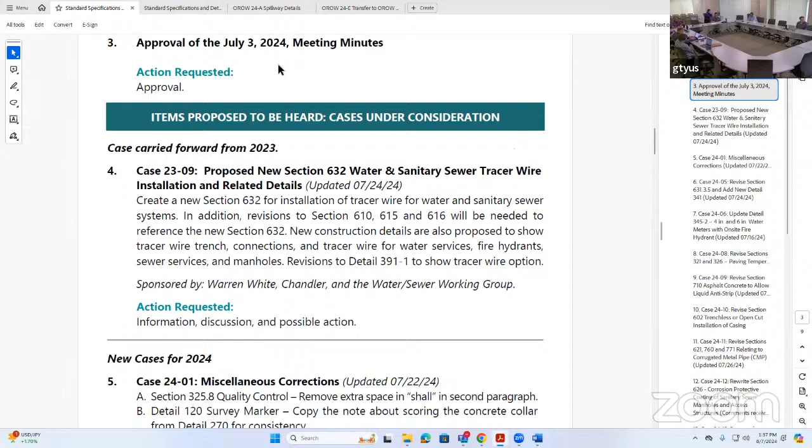Thank you, Gordon. All right, we're going to move into items proposed to be heard for cases under consideration. Agenda item number 4, cases carried forward from 2023. Case 23-09 is a proposed new section 632, water and sanitary sewer tracer wire installation, and the related details. This case is sponsored by Warren. Rachel, are you going to be covering for Warren today on this case? Yes, I'm your designated Warren today. He's on vacation. All right. Very much. You want to give us an update on the case?

Yeah, absolutely. So the last time this case was brought before the committee in July 2024, it was determined that we would revise section 632.1 and add a new paragraph regarding the purpose of the tracer wire and referencing ARS to allow for other acceptable methods for locating underground facilities, marker balls, the little marker flags that are above ground, et cetera. Section 632.3.1 general was also revised, adding a bullet to account for the installation where the tracer wire doesn't follow a main line or service lateral, and instructions for how to do that. Also added that PVC conduits are required to be shown on the plan sheets and the as-built. And then detail 399-3, the tracer wire for a fire hydrant, was also revised, adding language for alternate grade level and in-ground access boxes.

I think Gordon's trying to catch up. Oh, sorry. No, it was a long one. Okay.

So this particular case is up for possible action today. Before that, we'll move it into open discussion. I don't have any additional comments on this case. I already got with Warren on that before he left. Does anybody else have any discussion they want to bring up on this particular case? Hi, Mr. Chairman. This is Josh Ford from the city of Buckeye.

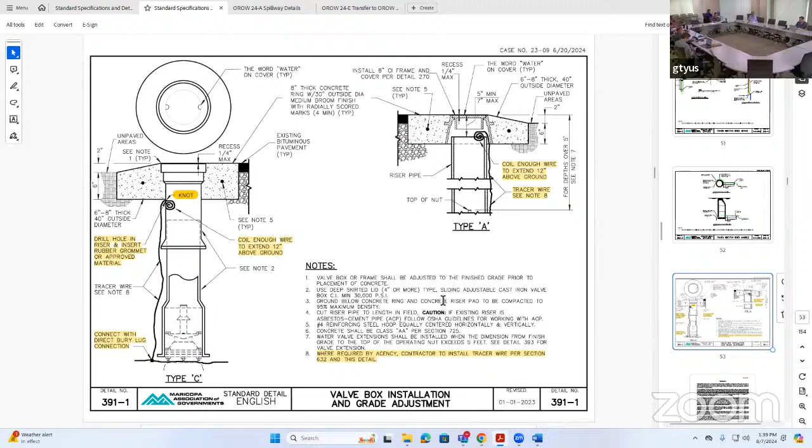Yes, Josh? I was just going to share, I know last meeting there was, I think, some discussion about the fire hydrant detail and whether putting a box on the hydrant would be a concern to fire departments. I believe that's what led to kind of an alternative location. There was a request to coordinate with our local fire departments, and I did do that. I sent that over to our fire marshal here at the City of Buckeye and asked for his input, and just wanted to share that at least from his and the Buckeye fire department's input, there were no concerns with either option presented here for the termination access box.

So I'm hearing there were no concerns. Is that correct? That's correct. Great. Yeah, I ran it through my fire marshal's office as well prior to last month's meeting, and the response I got was preferably attach it to the backside of the hydrant so it doesn't interfere with taking the caps off the hydrant. But other than that, they had no concern with it. Anybody else check with their fire marshal's office? Anybody else have any feedback on it? You can see on the detail, the alternate access is shown now. Yeah, thanks for pointing that out, Gordon.

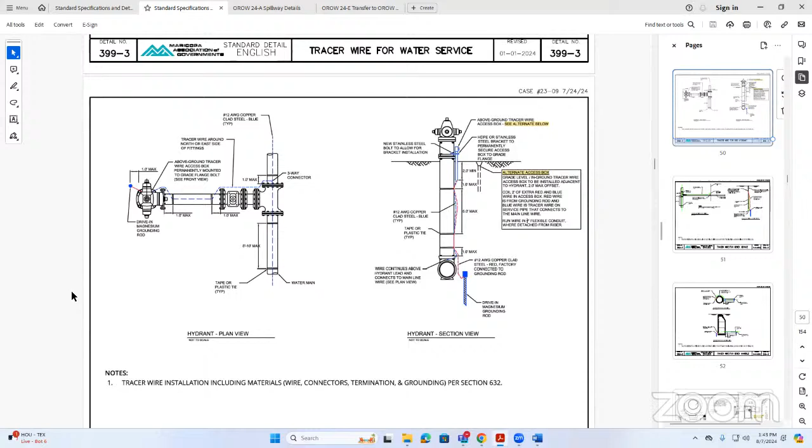Do any other committee members have any feedback or comments on this case? I think it looks pretty good. I agree. I don't think lines on that alternative would help clarify anything. Thank you, Paul. Well, hearing no other additional comments or discussion, I'll entertain a motion for action to go ahead and vote on this thing and get it through.

Gordon, can the case sponsor make a motion? Yes, they can. Rachel, do you feel like it's ready to go through? I do. Would you be willing to motion for a vote? Oh, yes. Thank you, Rachel. Can I get a second to put this into a vote? This is Josh Ford with the City of Buckeye. I'll second that. Thank you very much. With the motion and second, we'll move into a roll call vote.

Okay. Start with ADOT again. Yes. Avondale, yes. Buckeye, yes. Chandler, yes. El Mirage, yes. Gilbert, yes. Glendale, yes. Goodyear. Maricopa County, yes. Mesa, yes. Peoria. Phoenix, yes. Scottsdale, yes. Surprise, yes. Tempe. Youngtown, yes. Thank you. The motion passes unanimously.

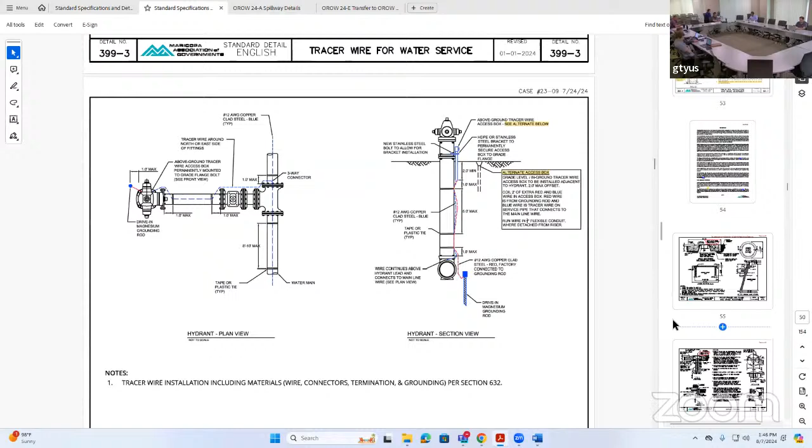All right, let's move into new cases for 2024 miscellaneous corrections. I don't believe we have any new miscellaneous corrections this month that we did not have last month. We'll open the miscellaneous corrections up to discussion if anybody wants to discuss anything in particular. I think there were some minor updates to detail 441, for the sewer cleanout. Should have been the steel hoop and the medium broom finish, correct?

Okay, and the score marks in the type A on the clean out also, because they weren't shown. I'm sorry, Paul, I didn't get that. Can you speak directly into the phone? The score marks in the concrete after you pour it, they weren't shown to do that on the clean out when you got to do it on everything else.

The radial score marks. Did I add that in there, Gordon? I think it's, yeah, just as a note at the top here. Okay. I think the only change from the last time was just spelling out vitrified. Yeah, I thought we captured that at the last meeting. Maybe I'm incorrect, but yeah, it was vitrified clay pipe versus VCP. All right, was there any other updates besides 441? I don't believe so.

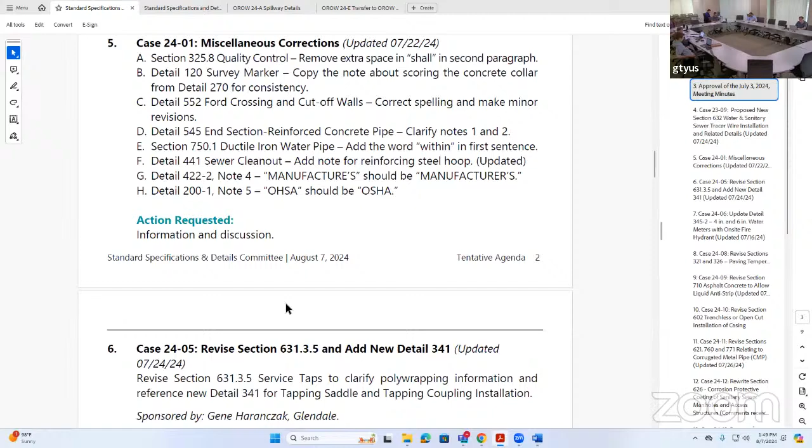The year is going fast. All right, back to agenda item number 6. Sorry about that, guys.

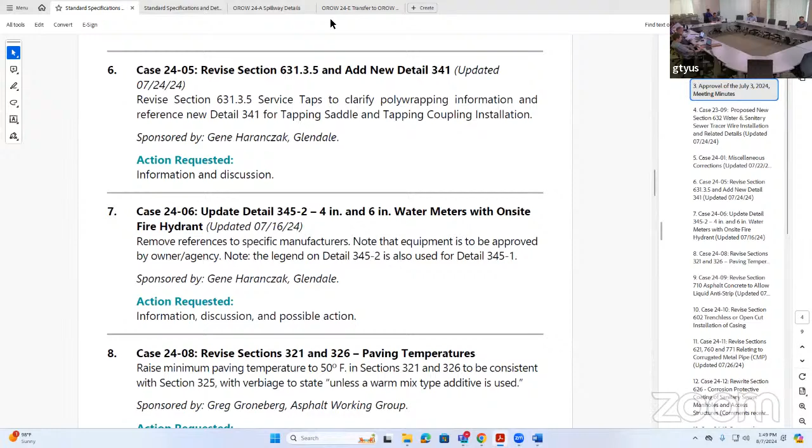So previously at the July 3rd meeting, Jeffrey Butters explained the differences in the dissimilar metals, how they negatively impact the ductile iron pipe, and they accelerate corrosion related failures when it's not applied and wrapped properly. So this one here, the only real update that I have is our drafter got it into CAD for me. I shared that with the group, shared it with Gordon. That should have been, not published, but updated on the website. Hopefully everybody had an opportunity to review it.

This one, I think it's there. I haven't received really any feedback. I did receive feedback early on, but the last meeting, I didn't receive anything except for the direction of the tape to make it match so it didn't look like this pipe was spun around the arch in the tape, and that was really it. That's basically the update on it. I'm going to open it up to discussion to the committee for any feedback on it.

Chair, Ryan Nichols with City of Mesa. I have some comments from my Water Resources Department. This is definitely not my area of expertise, so this is more of a comment / question, and hopefully you'll have enough understanding to answer it for me. I hope so. I put it together. So as I understand it, this has to do with new services in general, and this comment is maybe not exactly associated with that, but related. So I'm just going to read the comment as I received it here.

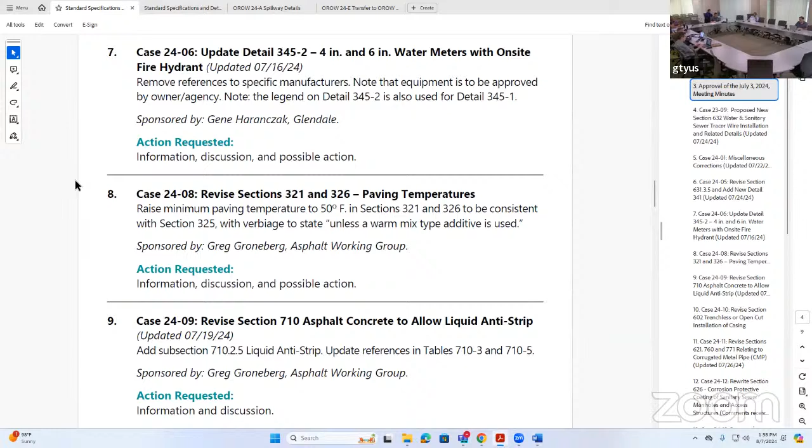All right, moving on to agenda item number 7. This is case 24-06, update detail 345-2, 4-inch and 6-inch water meters with on-site fire hydrant. So this is a water meter to meter the fire line. This one here. I did have a couple updates on it. What you see in red were the updates from the last meeting.

Basically, up in the top language, you can see where I put the meter type and manufacturer, and then also per the manufacturers with an apostrophe S. And then if you look at note 8, the 2-inch water meter type and manufacturers at the discretion of the owner or agency. Those notes were made, and then also at the very bottom, manufacturer apostrophe S for that as well. And same thing, water meter type and manufacturer.

So this one, Gordon was kind enough to help me out in getting it into a clean version. Did we post that? Oh, there it is. Thank you, Gordon. So this one here, I'll open up for discussion to the committee.

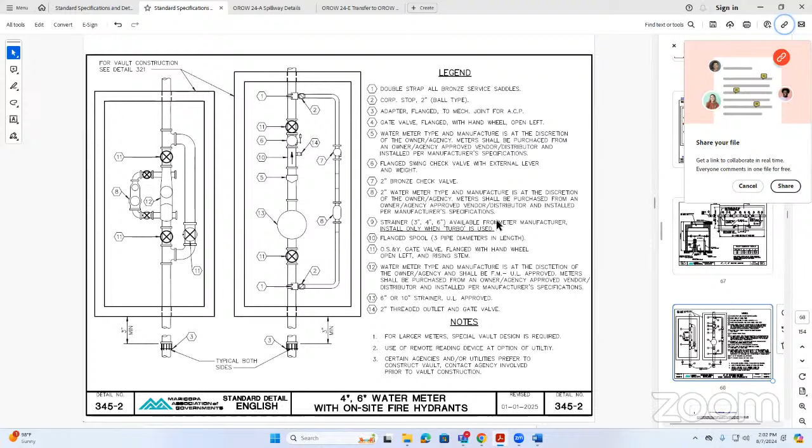So Glendale does not meter on-site fire hydrants. We backflow them. We do have a backflow on them. This was an existing detail, and hopefully this gives you some clarity. The motivation here was for me to try to remove the manufacturer-specific names that were called out. That was really the only motivation for this whole thing. It did kind of grow a little larger than what I anticipated, but we've sorted through that throughout the meeting.

But you'll notice on the original detail, it called out Rockwell, called out Hersey, called out Neptune, which not all, but some of those have been bought out by other businesses and are no longer in business. That's why I proposed the case to change just to more of a general, at the agency's discretion. Does that help answer your question? Yeah, so it sounds like you're saying this is just more cleanup on some references rather than reinventing the wheel, or rather than actually an overhaul of the detail itself. That's correct. Okay.

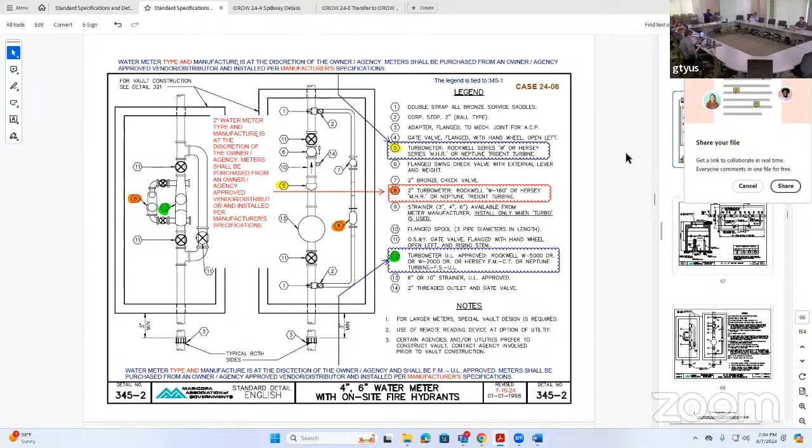Okay, thank you. Hey, Mr. Chair, I was just mentioning on item number 3, this is Jose with the City of Phoenix. Should we just make a note instead of calling out the mechanical joint coupler for ACP, just for different pipe materials? I'm not sure that ACP is used. Yeah, just maybe call out, you're right, unless you're tying on to existing infrastructure that's 20 plus years old. Mechanical joint that's needed for different pipe material. Yeah, adapter flange to mechanical joint for, let me look at that. Yeah.

Do you have any suggestions? I only have limited experience with this with Phoenix, right? So that will be a DIP main, but I'm not sure about other municipalities. Right. Well, you want to be able to adapt to DIP, to C900, whoever's using what. Yeah, I'm not sure what you will use in C900. What if you just had 'to mechanical joint as needed' or something like that? Yeah, as needed for different pipe material. Because if it's DIP all the way through, you're not gonna need anything. Okay. All right. Those are pretty minor changes.

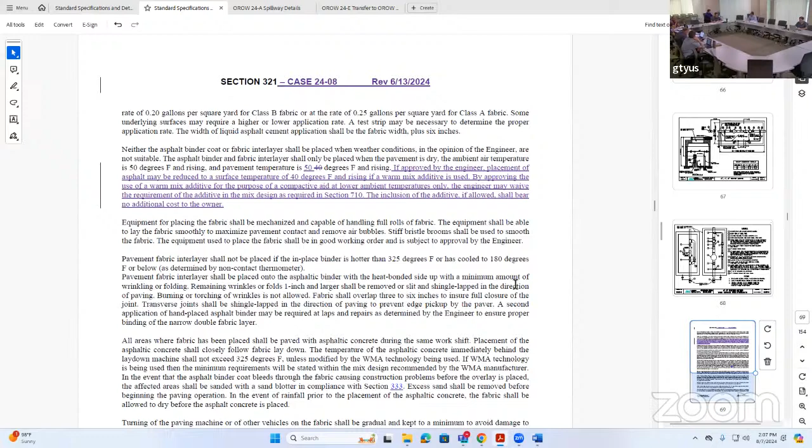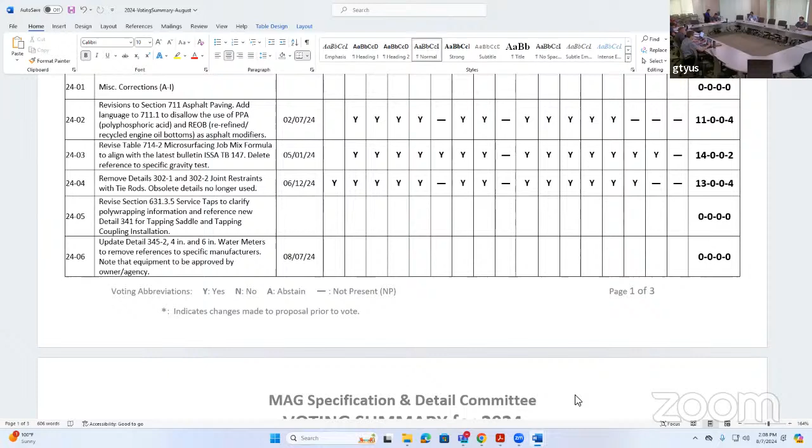Yeah, I think it's ready to go, but I'm going to open it up to the committee for discussion. Anybody have any comments or questions on this particular case? All right, hearing none, I'll entertain a motion to vote. Chair, I'd motion to approve case 24-08, revised sections 321 and 326 paving temperatures. Thank you, Ryan. Can I get a second on this case? This is the town of Youngtown. I'll make that second. Oh, thank you very much. All right, with the two motions, we'll move into a roll call vote. Okay.

Case 24-08. Yep, that's correct. Peoria, yes. Avondale. Avondale. Buckeye, yes. Chandler, yes. El Mirage, yes. Fountain Hills. Gilbert, yes. Glendale, yes. Goodyear. Maricopa County, yes. Yes. Yes. Peoria, yes. Phoenix, yes. Scottsdale, yes. Yes. And Youngtown, yes. Thank you.

The case passes unanimously. Thank you, Gordon. Thank you. I can barely hear you. Avondale votes yes on that. Peoria votes yes. I think your mic is off, Gordon. Oh, I'm sorry. You're right. My mic was off. Probably hearing me through Gene's mic. But is there anybody that I missed? Okay, I think we're good then. We have Tempe. I don't believe Tempe's present today. We have a yes on there for the previous case, 24-07. That was last month, I think. Okay. All right, thank you, committee members.

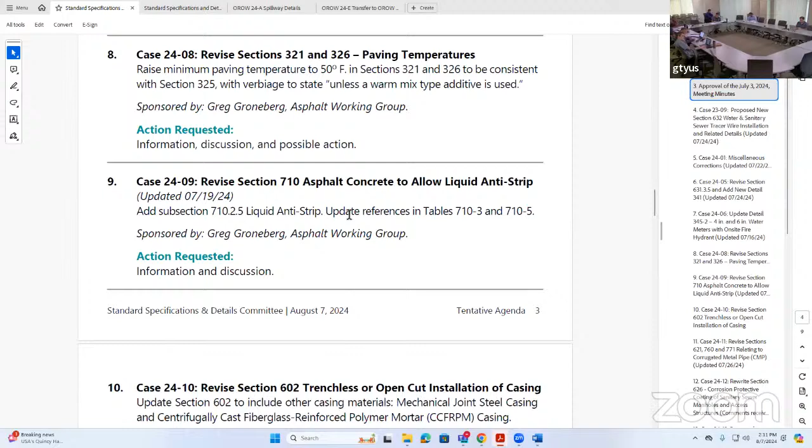All right, we're going to move into agenda item number 9. This is case 24-09, revised section 710, asphalt concrete to allow the liquid anti-strip. This one is also brought to us by the Asphalt Working Group. Greg, are you going to give updates on this one? I am, Mr. Chairman. So there's only been one change that was revised after last month. Last month, you saw something very, very similar to this one.

Gordon, if you go to page 710-30. Yep, that one right there. So last month everything was the same except we had X's where the Marshall and gyratory PSIs were, while we were still doing some investigative work. Last month we talked about the bottom paragraph that used to exist below this table, and when it got to the real world, how would you administer this, having 3 years of historical data, if there was a new pit. There was a lot of potential confusion on how that could be looked at.

So the thought was to do this instead: take the Marshall and the gyratories from their current 100 and 75 pound respectively in MAG, and raise both those minimum values by 25%. That is where that number came from. So now, if you're going to use a liquid anti-strip, either by itself or a combination thereof, it has to meet that 25% higher bottom threshold, just to give a little bit of extra assurance.

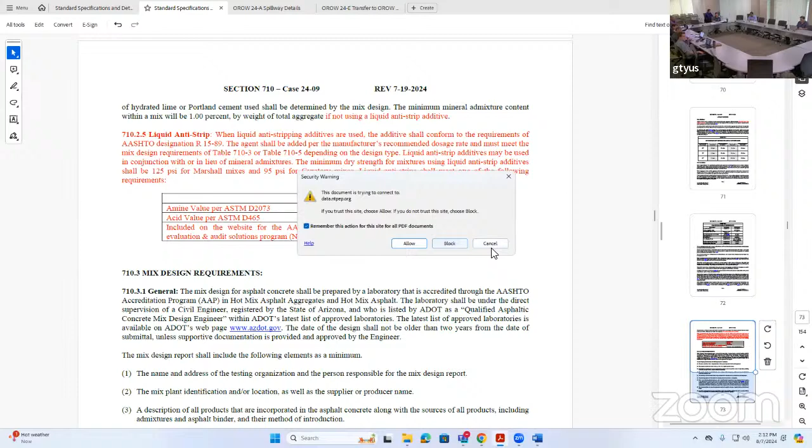We had one other comment too, as far as the link. Gordon, I cannot get that link to paste in there as a link for some reason, but if I type it all in, I can get that to come up every time. I'll make it a hyperlink. Yeah, I couldn't seem to get it to do it, but it comes up. But anyway, neither here nor there. That's where this case is.

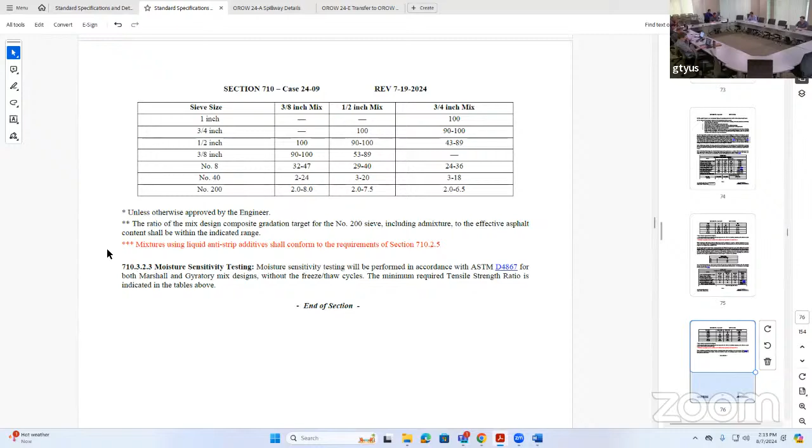There's two notes then below table 710-3, if you go down there a bit. So now there's 3 asterisks behind number 6. And the note below just says mixtures using liquid anti-strip additives shall conform to the section, saying you have a higher minimum threshold than what's listed in the tables. Other than that, I'd open it to the floor for any comments, questions, concerns. We'll open it up for discussion from the committee. Thank you, Greg, for those updates.

Jose with the City of Phoenix. Just a question. Was the data ever gathered and distributed to find out exactly what the historic dry strength has been on the various mix designs from different suppliers? So pretty much all of them. Historically, we've always kept it at the 100, and it appears that most of them are considerably higher. The same trend would probably still continue even with this, especially if you use a combination thereof. Straight up by themselves, don't know.

There's so many new technologies out there to vet every single one to know whether one might drop all the way out. But there's also another group that says maybe these higher tensile strengths, when you get up into the 180s, 200s, are leading to some of the cracking we're seeing. So I don't know which school there. So the 25% was kind of like a happy medium?

So the thought process behind the 25% increase was that a bunch of people said MAG's minimum thresholds have been in there for years. If you average, say, 150, the thought was we'd drop that one by 25%. So instead of keeping that one at 25% less, let's just raise the bottom level. No, I understand the idea, but how did we reach just increasing it by 25%? Did we just pick a number?

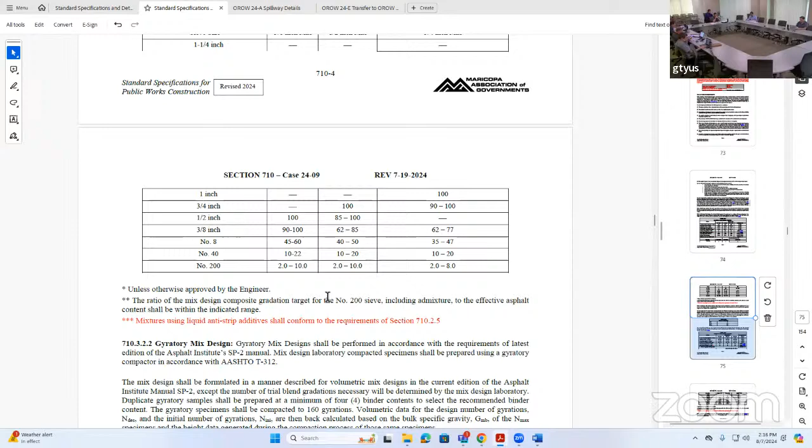Greg, I got a question for you. So the section, you mentioned the 3 asterisks note that references back to section 710.2.5. Maybe I'm a cynic here, but people don't read the notes. They just see the 100 in the table and they won't read the note because they'll see what they want to see. Would it clarify anything? And I'm asking the question. I'm not saying that this is what I think needs to happen, but would it clarify it if in the table it said 100/125? Because then if you ask the question, well, which is it, 100 or 125, you're more likely to see the note and go back and refer to the section where it clarifies that.

I would argue that the same would be considered for somebody that may already have a current Marshall mix, and somebody may want to say, well, I'm not using liquid antistrip. Then now somebody's saying, well, the table says 125, I could choose. And the only reason we kept the asterisk, Ryan, was to keep it consistent with the other two notes that already existed within the tables. Like the double asterisks. Yeah, there's a single and a double asterisk in the same table, so we just kept it consistent for the same reason. Okay, fair enough. That was a good question, Ryan.

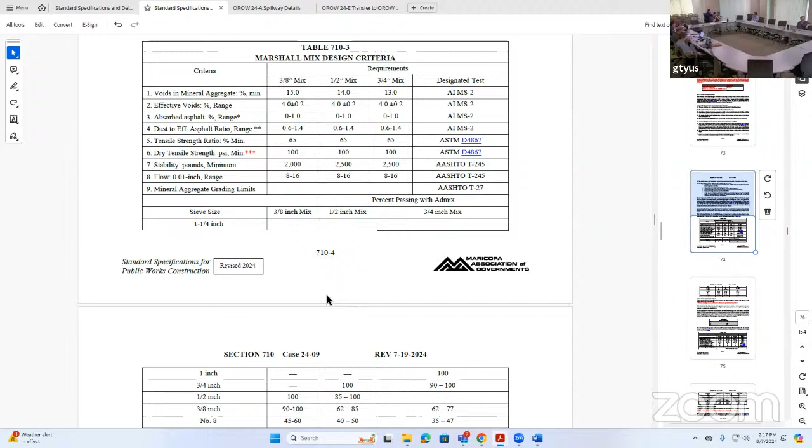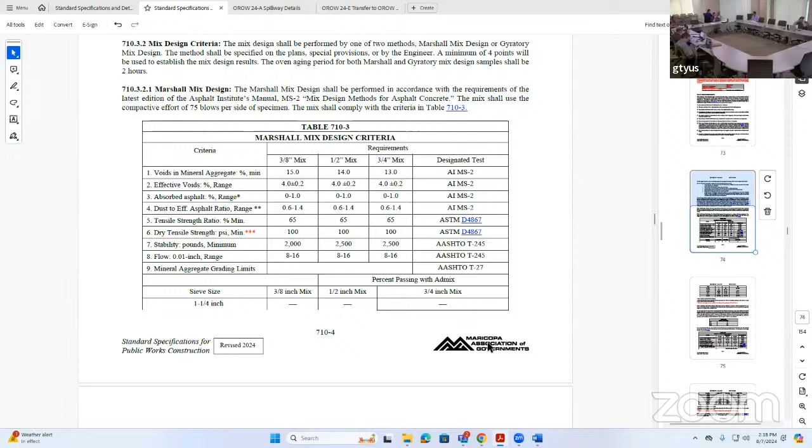Yeah, I agree that it's all technically there, and if I had to go to bat to defend it, I definitely could. Gotcha. Yeah, I see Greg's point, though. If we do add that additional number next to it with a slash, it can be interpreted as either or. That would be more of a concern there. That's a happy medium, so you don't have to flip the page. You could add the 125 PSI to the note on the 3 asterisks. Right. So under table 710-3, you can say mixtures using liquid antistrip shall require 125 PSI dry strength as listed in 710.2.

If you don't want to flip the page, I think the language is there, and you're just trying to reference them back. Yeah, we don't approve mix designs with the intent to go through this level of effort, but I can live with the wording as is. Okay. Yeah, it was just a question. I'm not insistent by any means. No problem. That was the reason why it was done, because we already had 2 other ones that followed the same consistency.

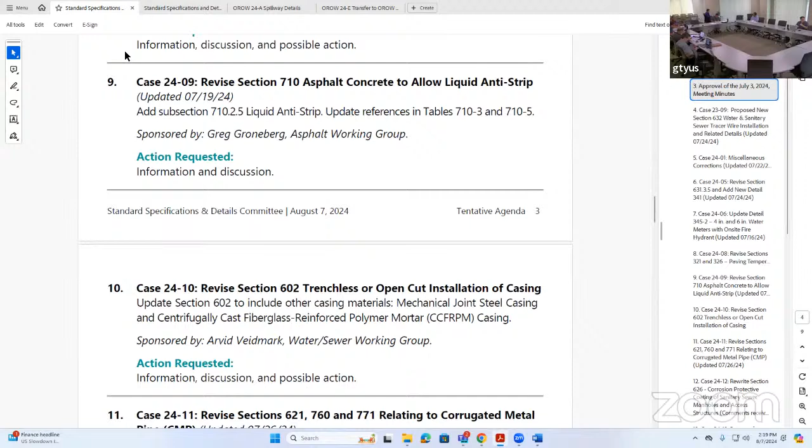Also, for the online version, I typically add hyperlinks when it references sections. So you can just click on that link and it takes you back to the previous page. That would satisfy your comment. Perfect. Yeah. Any other comments from the committee on this case? So hearing no other comments for case 24-09, we'll move this for possible action at September meeting. Or wait, this one is not up for possible action yet. So we're going to move this to possible action for September. Thank you, Mr. Chairman. Thank you. I'd suggest everybody get their eyes on it, review it, make sure that they're good with it before September's meeting.

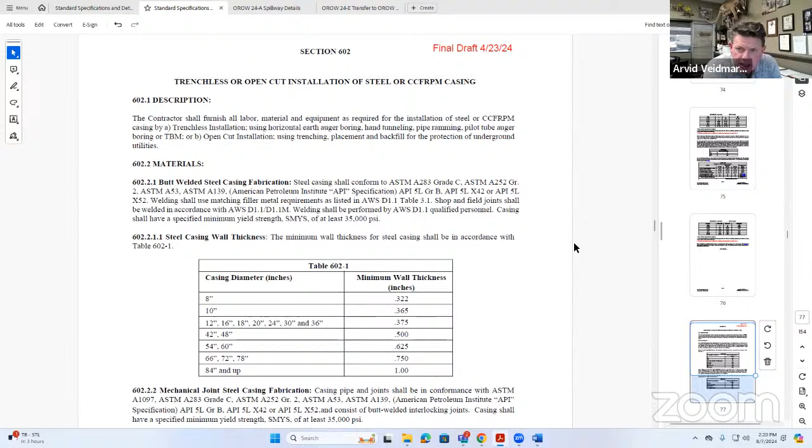All right, moving on to agenda item number 10. This is case 24-10, revised section 602, trenchless or open cut installation of casing. Do we have Arvid on the line? Yes, sir. Arvid, you want to go ahead and give us an update on this one? Yes, sir. We have in front of you an updated MAG 602 with the offering of additional casing options for the municipalities going forward. Over the last 10 years, we've been installing CC FRPM, which is basically Hobas, as well as mechanical joint steel casing, a Permalok or a Trilock type material. The big reason for putting these into the spec and making them an option as a casing material is primarily to do with the railroads.

Many of you on the call have interacted with the railroads over the last 5 years with the introduction of RailPros and the new requirements of Zone A and crossing and working around the clock. We're just limited on people. We no longer have crew and staff availability. We're all suffering through lack of people. So we need materials that allow us to get the casing installed through Zone A, which is typically a 50 to 100 foot crossing, in a timely fashion so that we're not burning out people and running into safety concerns. That's what these materials give us the ability to do. Plus, they give you a casing that is just as good as a steel casing. So the CC FRPM material, we install that with the TBM 48-inch and larger.

We can hand tunnel it, of course, 42-inch, but it's used oftentimes in the SRP APS world, where we put it through the ground and then put a duct bank through the casing and then fill it with grout because they want a thermal grout. But this is a great product for many of you to start considering to use for the crossings that you have on your typical crossings, where we can use the TBM because it goes together.

It's a bell and spigot gasket with a rubber. It's watertight. And then you can seal off the ends like you do a regular steel casing. It's going to last forever. And then it just gives us the ability to go in a more efficient manner with the installation.

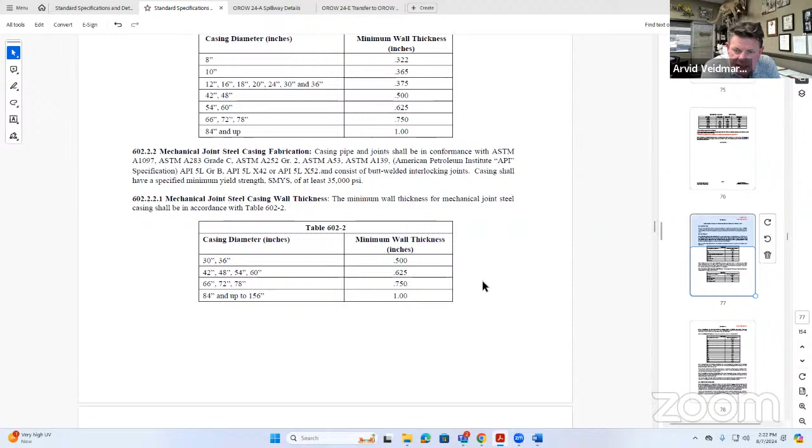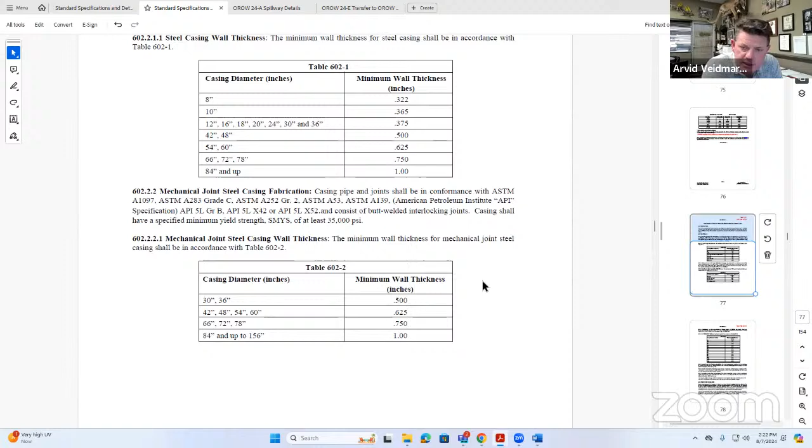The same is true with the mechanical joint steel casing, the Permalok or the Tri-Lock material. It's a snap together joint. And there again, it allows us to put it together in a timely fashion without having to spend time welding the joint. So that's what this case is about. It's simply adding in some different material options for the casing as the industry is growing, and we've got more options to give you.

Thank you for that insight, Arvid. This one, Glendale definitely is on board with. Our principal engineer had commented that, as long as it's leak-free, which you had already mentioned, it's high strength, which you've already mentioned, it's comparable to ductile. The other advantage is it is lightweight and it should provide a long service life, correct?

Yeah, absolutely. When we talk about the mechanical joint steel casing, the only difference between mechanical joint and welded joint steel casing, of course, is welding versus no welding. We installed just shy of 1,000 feet of mechanical joint steel pipe underneath the Cave Buttes Dam a couple of years ago for the flood control. They're using it as a secondary outfall. So if the Corps of Engineers and the flood control are approving it, and it is approved by AREMA, then of course it's something that I think is very suitable for any of your projects.

The HOBAS or the CCFRPM pipe is a great product. It goes underneath railroad tracks. It's approved by AREMA, and it gives you the options to look at other casing materials. And more importantly, I'm going to just put it this way. It opens the communication channel for us to talk about using it in certain applications.

Soil conditions in the Phoenix metro area, as we know, are very diverse. And depending on the project that you have, if we can get on board soon enough during the design and catch it early enough, we oftentimes can design in methodologies and techniques that are going to be more cost effective. And we can do that now that we've got casing options. Whereas if we just had steel welded casing, we were really limited on what we could do in certain technologies that we have out there.

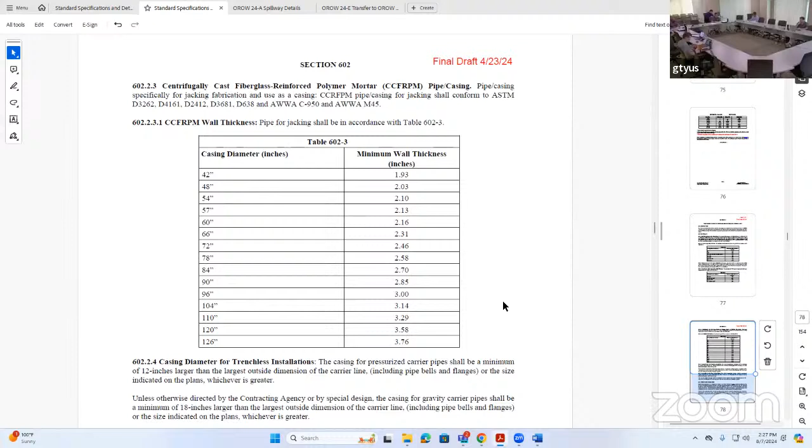Yes. Thank you, Jim. Can I get a second motion to move this case into vote? Mr. Chairman, I'll second that motion. Thank you, Dan. All right, with two motions, we'll go ahead and move into a roll call vote. Thank you. I think my mic's on this time.

Mesa. Yes. Peoria. Yes. Phoenix. Yes. Scottsdale. Yes. Surprise. Yes. Tempe. Youngtown. Yes. Is there anyone I missed? Okay, it looks like the motion passes unanimously.

Thank you, Gordon. Thank you, committee members. I appreciate your help with this, everybody. Arvid, thanks for bringing this case forward. I think it's overdue. Yes, thank you. We'll be presenting a new one with some trenchless ideas going into 25, and we'll be putting some PowerPoints together for the committee so we can start to look at some new options to help, again, the industry as it continues to grow and get a handle on it before it gets too far in the ground. Thank you, Arvid. My pleasure.

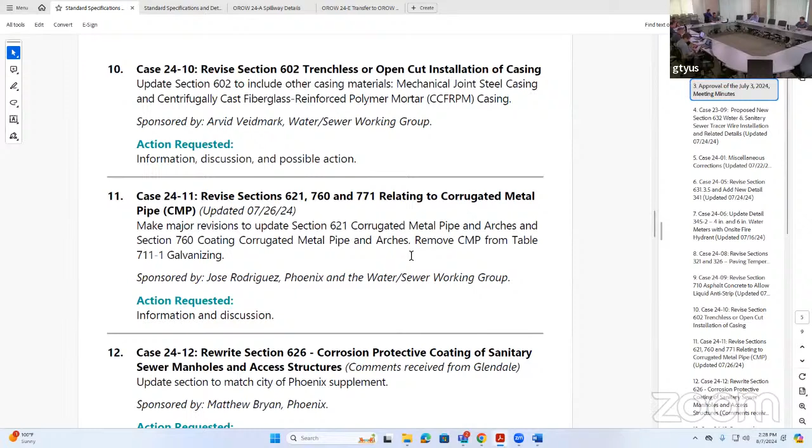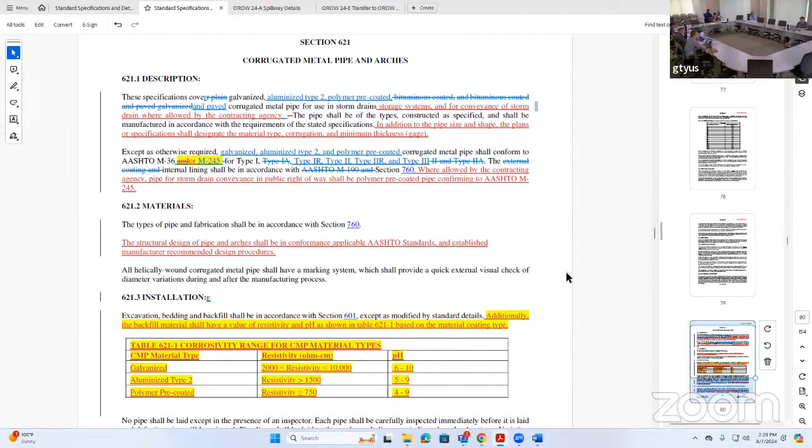All right, to agenda item number 11. This is case 24-11, revised section 621, 760, and 771 related to the corrugated metal pipe. This one is brought to us by our very own Jose Rodriguez. Thank you, Mr. Chairman. So the package this time, highlighted in yellow, is the changes that have been done since the last time the draft changes were sent out. They include the clarification and addition of resistivity and pH table related to the type of coating that the CMP material has.

Also under section 621.3.2, pipe deflection, we clarified that the maximum deflection is 7.5% of the nominal inside diameter. Thanks, Mr. Chairman, for that comment. It's not a joint deflection, but it's the deflection of the actual pipe. It's a squished pipe. Squished pipe, yes. That's English. Let's put that in there, right?

And also in 760, we had received a comment to at least specify a minimum thickness or gauge thickness that serves as a floor for this pipe product. We've been working with Contech as the main supplier that's providing input on some of this stuff. And there's a lot of variables that go into the design of the thickness. For a CMP pipe, ultimately, this product should be designed. But I think in consensus, as a minimum floor, a 16 gauge should work, not for most applications, but as a baseline in the lack of any other information.

But I'm hearing the thickness would be the same all the way around. We wouldn't just have a thickened floor, or is that what you're saying? No, it's the thickness of the gauge of the overall pipe material. Okay. Yes.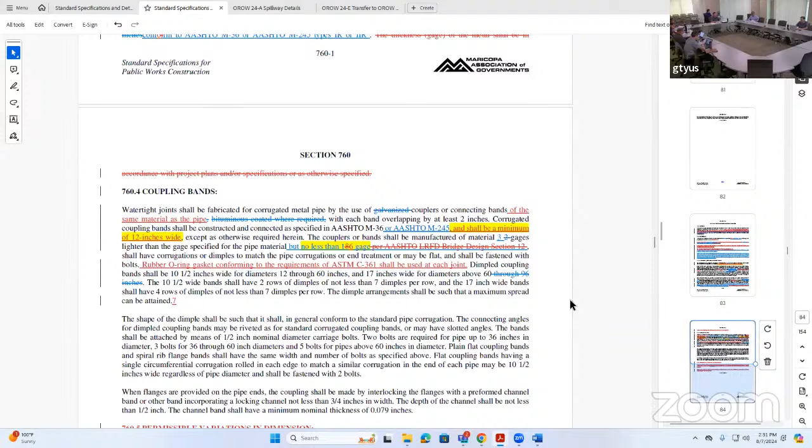And there was also a suggestion that came from Contech as to the coupling bands that are used for this product. They had some concerns because they see out there sometimes contractors use an 8-inch band. They really recommend the use of a 12-inch band, so that's been updated on this spec. Good. Yeah, I think that's a great point, a 12-inch band, especially when you start getting in those larger CMPs. Yes, mainly that's where it came from, because this is ultimately going to be used also in conjunction with the right-of-way detention tanks.

So those are all the updates. So if anybody has any other comments or wants to take it to their groups and provide any feedback, especially those that are using CMP pipe, even if it's not as a storm drain or pipe culvert material, but at least in detention, any information that is available out there that we should incorporate into the specs is welcomed.

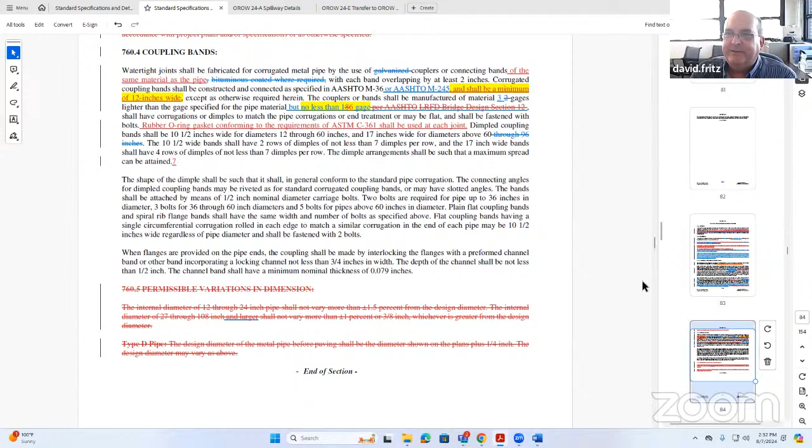Does Maricopa County proper still use CMP in the right of way? Does anybody know? I'm not sure. Let me get my microphone on here. We recently updated our pipe standards, and we don't allow it underneath the roadway prism, but it potentially could be used outside the roadway prism. Possibly like a driveway entrance or something of that nature? Probably no, like completely outside of the road, probably not even a driveway anymore. Okay, so completely outside of the right of way. Outside the roadway prism entirely, or anything associated with that. Okay, thank you.

So this item is obviously open for discussion. Does anybody have any questions or comments on this case in particular? I'd suggest everybody take the time, look at the revisions. Jose, do you foresee this case carrying over into next year, or are we going to push to try to get this up for action at the next meeting? You think it's close? I'm not sure that it is that close because of the level of comments that we've gotten. I don't prefer it, but if it carries over, I completely understand, because I don't think we've gotten a lot of input on it yet. So I'd definitely like to get some agencies' eyes on this.

Yeah, it is a relatively new case. Yeah, it came in mid-year. Well, if we're going to put it up for action next meeting, it needs to be brought up at this meeting. Probably not on this case, because the committee hasn't seen a revised version for a while, so this is the first time they've seen a revised version. Okay. So this is looking like a carryover case. All right, any other comments or questions from the committee regarding case 24-11?

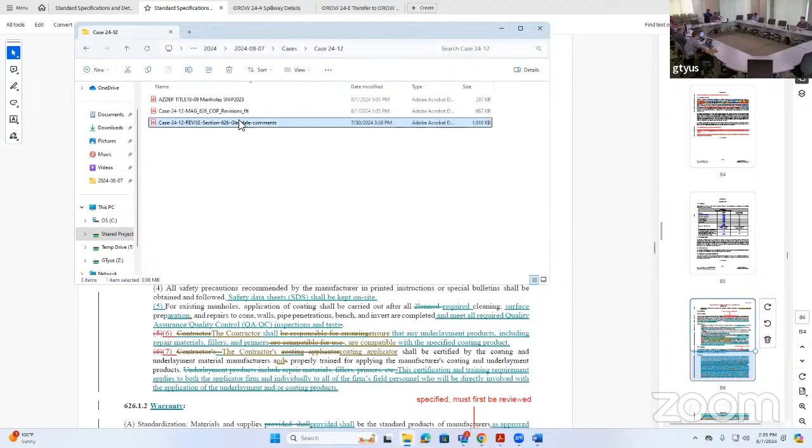So I'll open this one up for discussion to the committee. Does anybody have any comments or questions? Ryan? Yeah, Chair, just a comment from my water resources group that reviewed this. They noted that the coatings can either be sprayed or troweled, and they requested that coatings should be applied by trowel where a sewer pipe intersects the manhole, and suggested that the coating shall extend into the sewer pipe a minimum of 2 inches, if that's something we could add into the specification. We would have to look at that, Ryan, because we might want to check with the manufacturers of the product. I don't know if this material will stick to VCP or SDR plastic pipe. In my experience, it gets pulled off with the jetter nozzle, but thank you for those comments. Matthew, hopefully you can take note of those and get them addressed. Will do. Thank you.

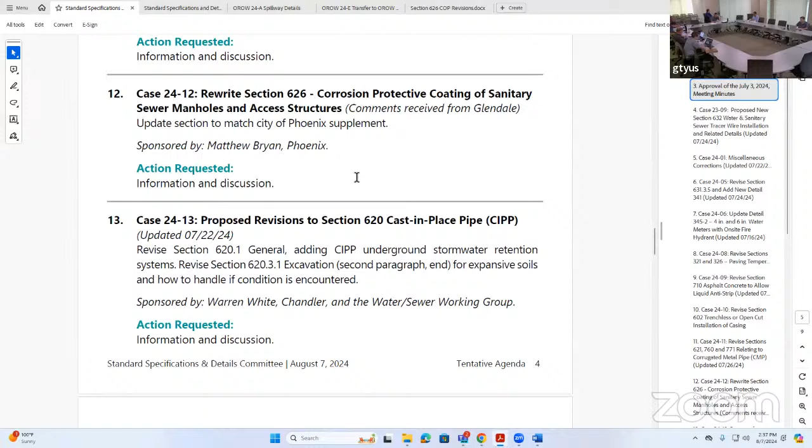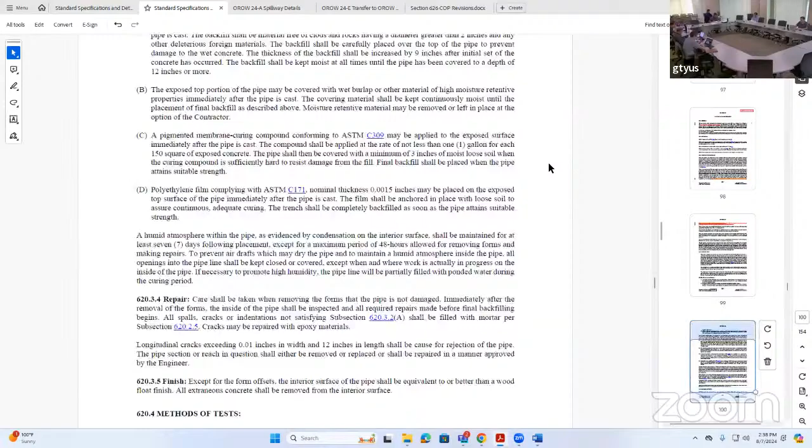Any other comments from the committee members on this case or questions? Okay, hearing none, we'll move on. Go to case 24-13, proposed revisions to section 620. This is the cast-in-place pipe. This one's brought to us by the City of Chandler, Warren White, but Warren's out. Rachel, are you covering for Warren on this one as well? Sorry, I was muted. I thought we were covering section 620, the next agenda item. Oh, okay. Sorry, I was looking at the wrong one. Yes, the only edit to this one is in 620.3.1, the excavation section, specifying that expansive clays need to be over-excavated to a depth of 8 to 12 inches, followed by filling and compacting. That's the only change to case 24-13? Correct, since the last meeting. Okay. We'll open this one up for discussion and questions from the committee.

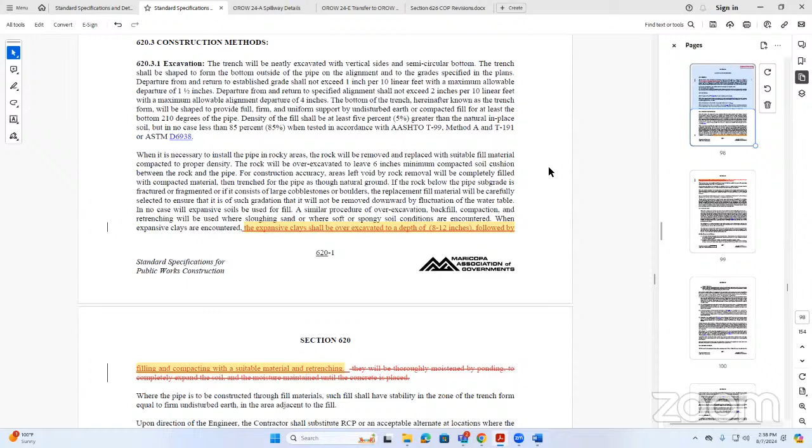All right, not hearing any, it tells me that we're pretty close. Rachel, would you feel comfortable moving this up for possible action at September's meeting? Yes. All right, I think that is the right choice. Gordon, can you put this up for possible action, please? I will.

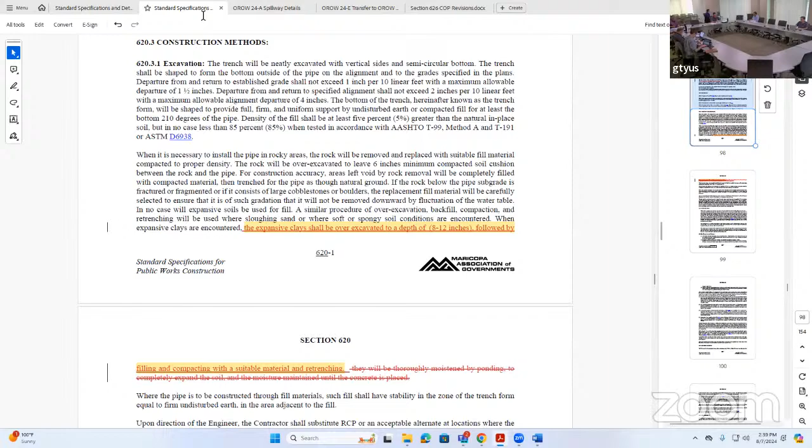All right, moving on. Items proposed to be heard for the outside right-of-way cases under consideration. This is going to be agenda item number 14, outside right-of-way 23-6. This is the new vegetated or rock bioswales. I think Peter's been handling this one with the outside right-of-way group. Peter, you want to give us any updates on this one? Mr. Chair, I don't think we've had any updates on this one. I think we had all the changes in the last revision. I don't know of any comments we've received.

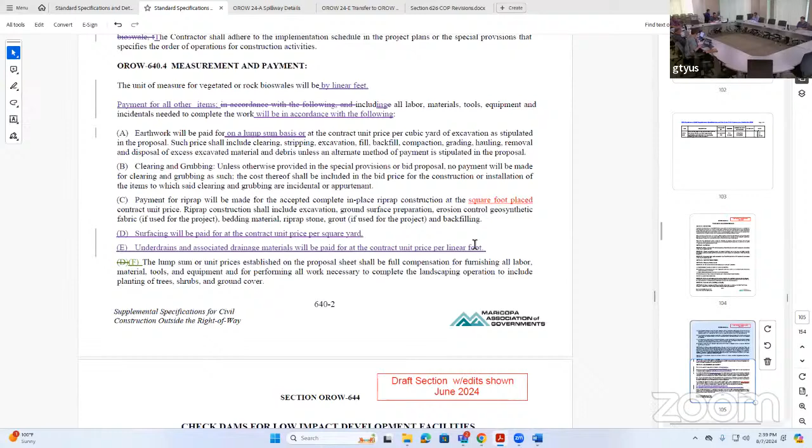Yeah, that's what I recall. That's why we put it up for action, because there wasn't any. You haven't received any comments since? No, I have not. Gordon, did you get anything from City of Tempe? No changes. So I think we captured them all last time in our discussion. And as you see them there, I think what we did last time was provide the edited version of the prior comments we received and how they were addressed. So I don't think there's anything left on this one unless somebody's got any new comments.

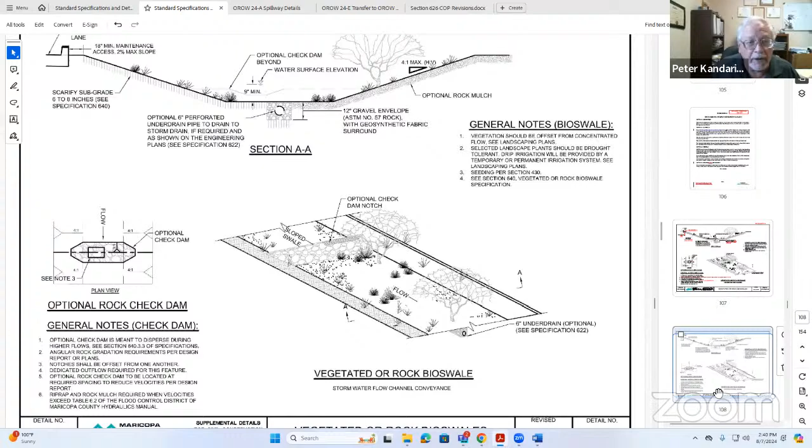You want to give a brief overview on what the details are for? So in general, the detail is identifying the concept of vegetated rock bioswales and providing the parameters for going ahead and building it. It doesn't give it a specific design, but it gives, call it, the bumpers for doing it, and that would be incorporated within a specific design plan. Part of that also has the optional rock check dam, and going along with that, there's 2 specifications tied to that. One is the rock dam specification, and the other, of course, is the bioswale itself. It provides the material requirements associated with those.

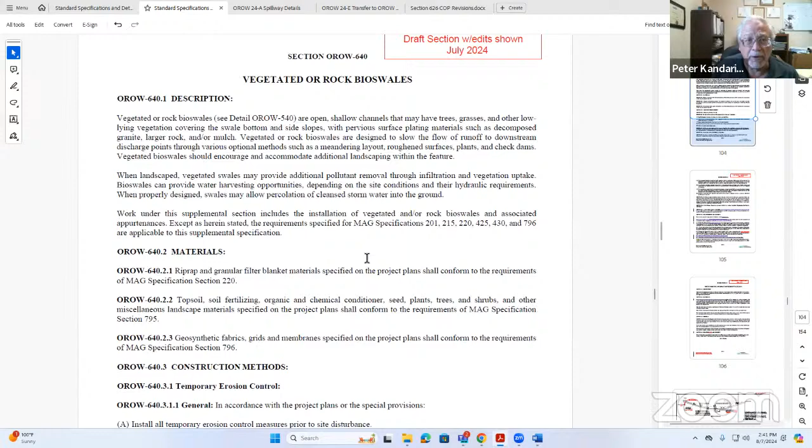So the intent was to finally get something going in terms of a drainage system for the low impact. This is really the first of the major ones that's going to go in since the landscaping has been put together. Don't have anything new to discuss on it. I think that's pretty much what we have. Peter, I think that was a great update on what the case is about in general. At this point, we'll open up for discussion or comments from the committee. Hopefully everybody has had an opportunity to look at it and they understand the desire to have this detail and why we're looking at putting it in the outside of right-of-way book.

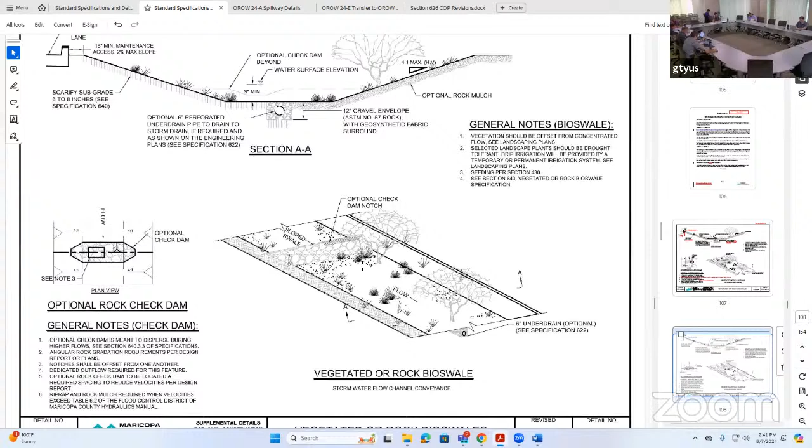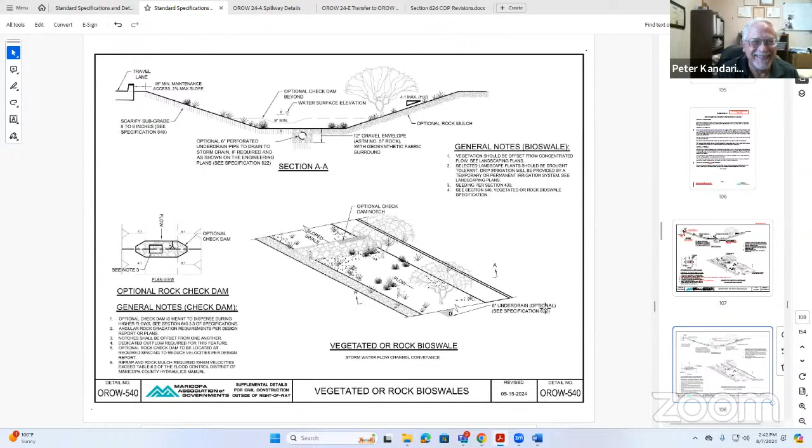So not hearing any feedback from the committee, this is up for action today. I'll entertain a motion to vote for outside right-of-way case 23-06. Can I get a motion to approve? I'm not sure if I can do that. City of Tempe had been sponsoring it, so I was hoping they were going to do that. I believe anyone on the committee can make motions and seconds, but only agency members are allowed to vote. That's the difference. Okay, well, I'll motion. If the motion's up, I'll second it. If not, I'll motion. Usually we don't run into that predicament because we have agencies motioning, but if that's the bylaws, Gordon, thank you. And Peter, we'll take your first motion.

I appreciate that. Can I get from the committee a second motion to approve? I'll go ahead and second the motion. Thank you, Ryan. All right, having two motions, we'll move into a roll call vote.

Thank you, Chair. This is the outside right-of-way case 23-06. ADOT? Yes. Avondale? Yes. Buckeye? Yes. Chandler? Yes. El Mirage? Yes. Gilbert? Yes. Glendale? Yes. Goodyear? Yes. Maricopa County? Yes. Mesa? Yes. Peoria? Yes. Phoenix? Yes. Scottsdale? Yes. Surprise? Yes. Tempe? Youngtown? Yes. Looks like the motion passes unanimously. Great. Thank you, Gordon. Thank you, committee members.

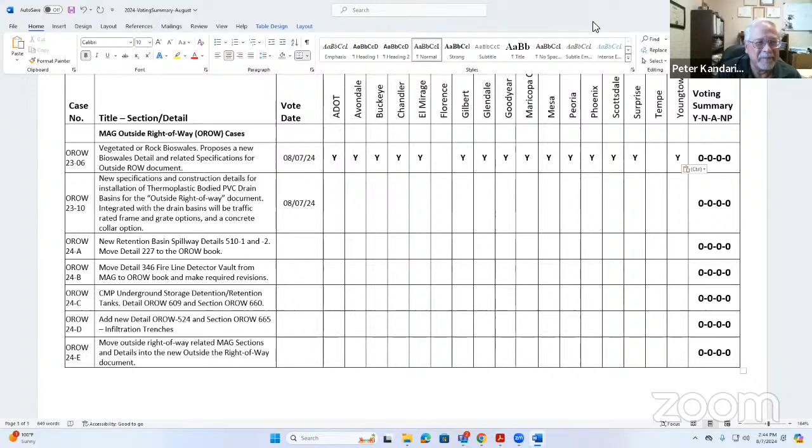Getting there. Yeah, to Jim's point, great job on that, Peter.

All right, we'll move into agenda item number 15. This is the outside right-of-way 23-10 for the thermoform PVC drain basins. This one, I think Warren was handling. This was a collaborative effort, but I believe Warren was handling most of it. Who's going to provide any updates on this particular case? Is that going to be you, Rachel?

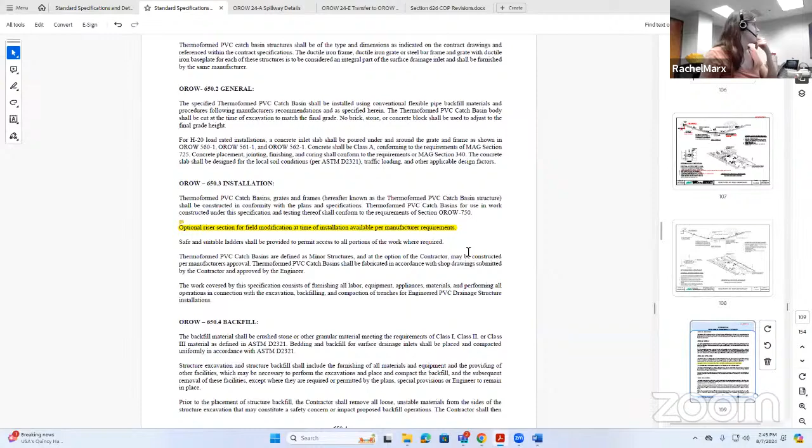Yeah, I can. The only update we've had since the previous meeting is in section 650.3 installation, just specifying that the optional riser section for field modification at time of installation is available per the manufacturer's requirements. And then the detail that accompanies that is updated as well to include that language. And I'm also here. This is Nick Burton. I oversee the case in the outside right-of-way committee.

Yes. Yes, Nick, thank you. You were at the last meeting when it was brought up for the adjustment. Yep. Great. Yeah, I recall that being our only comment, at least that I recall at the last meeting. There may have been another, but that's the one I recall. That is all that I was asked to provide an update for this month. So it was my understanding too that that was the only thing that needed to be revised. Great. Thank you, Rachel. Thank you, Nick.

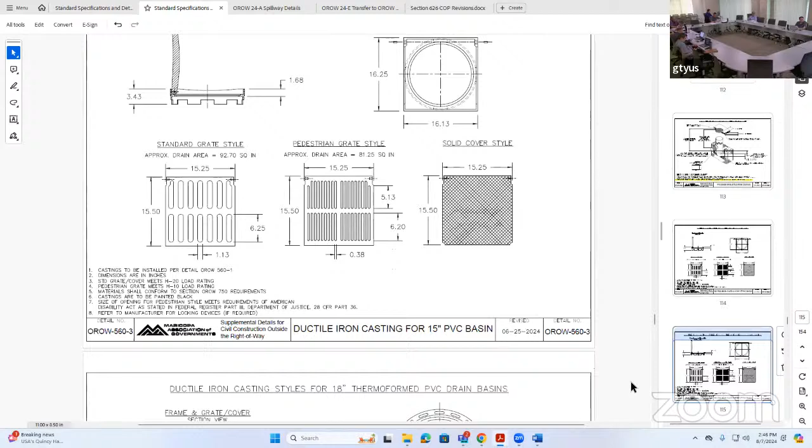This one's open for discussion. We'll open it up to the committee for discussion or questions. Committee members, this one's up for possible action as well. I know I burn a lot of mental calories reading it. I think it's perfect for using outside of the right of way. We use this same type of application for a couple police station parking lots that we had expanded, and it worked great. It was a low cost method. It served the purpose and it's functioning as designed.

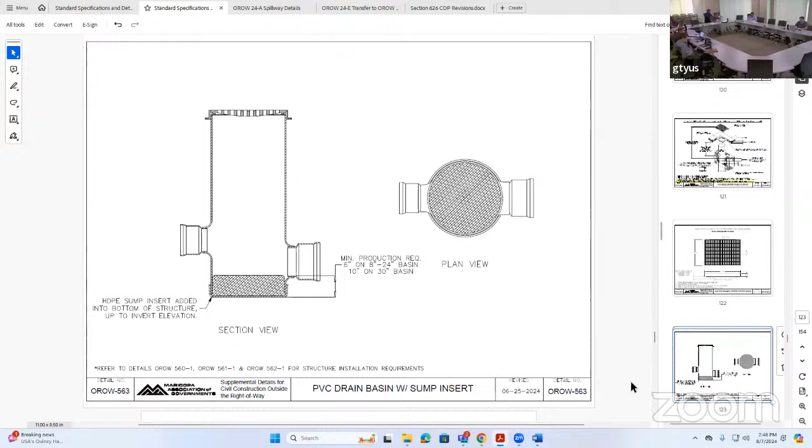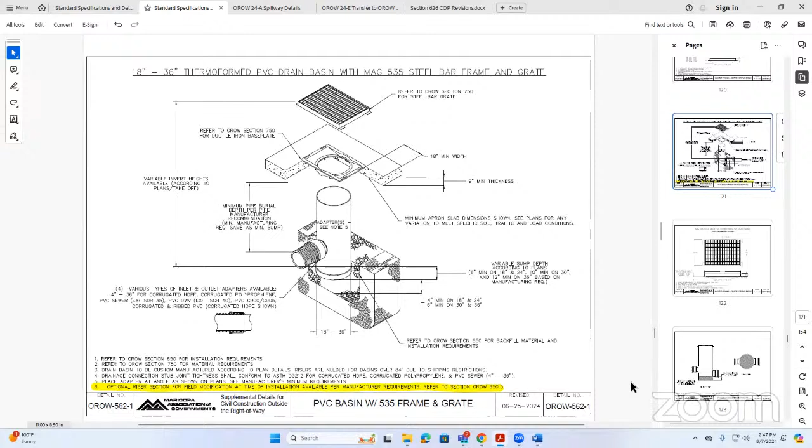All right, hearing no feedback from the committee, I'll entertain a motion to approve. I'll motion to approve. Is that Rachel? Uh-huh. Thank you. All right, we have one motion. I'll entertain a second motion to approve. I would, but I'm chair and I can't. This is Robin, Surprise. I second. Thank you, Rob. All right, we'll move into a roll call vote.

Okay, outside right-of-way case 23-10. ADOT. Yes. Avondale. Yes. Buckeye. Yes. Chandler. Yes. El Mirage. Yes. Florence not present. Gilbert. Yes. Glendale. Yes. Goodyear. Goodyear. Maricopa County. Yes. Mesa. Yes. Peoria. Yes.

Phoenix. Yes. Scottsdale. Yes. Surprise. Yes. Tempe. Not present. Youngtown. Yes. Is Goodyear still there? Okay, motion passes unanimously. Thank you, Gordon. Thank you, committee members. Looks like Peter has some things to put in the book.

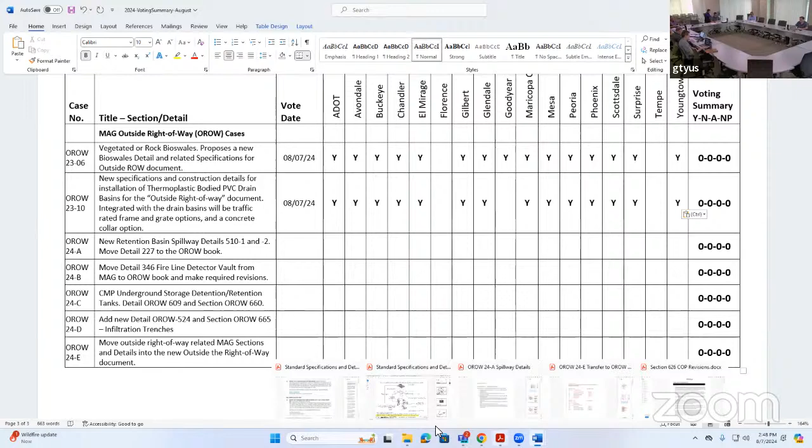Let's go ahead and move on to new outside of right-of-way cases for 2024. It's agenda item number 14, outside right-of-way case 24-A, retention basin spillway details 510-1 and 2, move detail 227. Peter, this one is from you. You're sponsoring this one. I wanted to note that the updates for this one did not make it into the packet. So if you could please give us a summary on the updates.

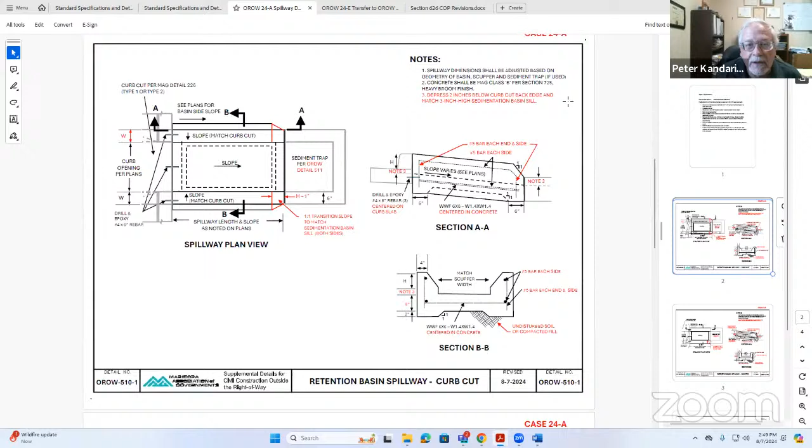So thank you, Mr. Chairman. Yes, it didn't get in the packet, but from the comments received, we had extensive comments, very good ones from City of Phoenix. And so we adapted those to the drawings. There's a red line version that shows it on both of them, and it's probably the easiest way to see these updates. So there's a description one. So you can see the red line version. This is the curb cut version.

Some of the major aspects are making sure to identify the depressed section that in this case would be below the curb, and then also as it enters into the sedimentation basin or sediment trap, make sure it's identified what the transition looks like. In addition to that transition, it was noted that there was not really a sufficient transition from the spillway itself to the sediment trap. So now you'll see that there is a transition slope and a pinching off of it down, so there's a smoother transition into it. That's now included.

It was pointed out that you wouldn't need to install this in the sediment trap as a separate installation. It'd probably be done at the same time. So there was no need for putting in a drill and epoxy and rebar. In fact, it was pointed out that MAG specifications likely would require some other kind of jointing there. This leaves it open now for being able to do that. So we took those epoxy pieces out. A large part was done in some of the reinforcement.

It was pointed out that the thicknesses and widths of some of these were not sufficient to provide adequate clearance, either to air or to ground, 3 inches to ground or 1.5 inches to air, to meet most concrete codes. So the widths on a number of those were changed to increase that. This one not as much as the other, where we had to go to a 6-inch width to make sure

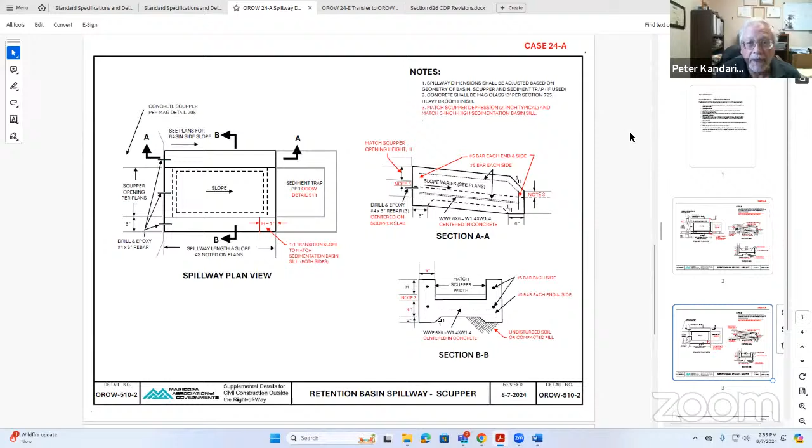scupper opening. Transition here is a little different because with the sediment trap, it would go straight and just taper right down to it. And again, the drop on one end and the sill on the other side matching that up. So a lot of cleanup was done on this one. And then again, the numbers associated with it. And then as part of this case, it's recommended to move 227 into the outside of right-of-way book, correct?

Yes. And then the final one shows that, which is moving it, giving an outside right-of-way number, moving the sediment trap on over. It was pointed out that we probably should not try to say that the spillway for the sediment trap must be the MAG standard, which is the new one, or the outside right-of-way 510. So it was recommended, let's leave that option open because there could be other spillways.

For example, the use of a riprap spillway, which we haven't got to a detail yet on. That'll be next year. So as to not disallow that option, we put in spillway per civil plans or outside right-of-way detail. Thank you, Peter. So for this case, we'll go ahead and open up for discussion and comments from the committee.

Peter, do you think this case will be ready for action at the next meeting? I think we're there. I think we got the majority of the comments this last go around. So I'd request that we have this for a potential vote. If we get something in between now and then, we could always modify that. But I would request everybody please look at those changes as they're shown there as red lines, just to make it easier. If I don't get something before the next meeting, I'll go ahead and finalize this, and let's see if we can get this one in. Great. Gordon, if we could put it up for possible action at the next September meeting, that would be great.

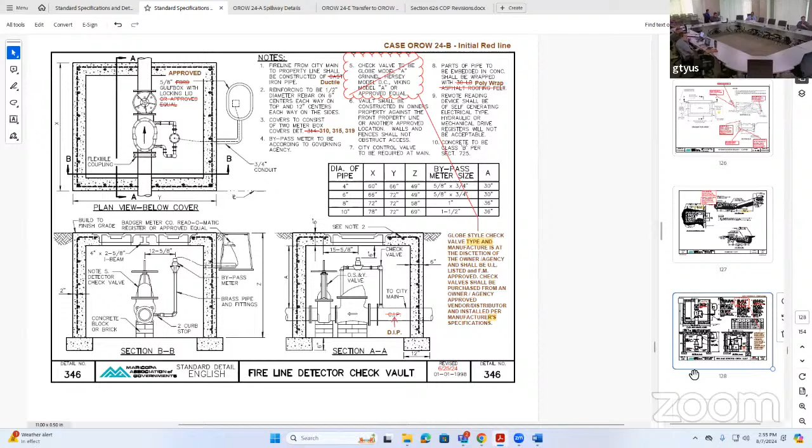We changed the Badger Meter Company note on the plan view on the left side of the page in the center. Just below where it says plan view, below cover, it said Badger Meter Company and Read-O-Matic Register or approved equal, and we revised that to agency approved remote metering register. That way, if you're not using a Badger, you can use whatever your heart desires. Gordon was kind enough to put this one into a clean version for all of us to look at.

This one, again, the motivation just for the whole committee, motivation for this detail change was to eliminate the individual manufacturer names that were called out. A lot of them were outdated. They were bought out by other agencies, so on and so forth. Their model numbers, catalog numbers may have changed. So now we're given more flexibility throughout the detail by just leaving it up to the agency.

This one here, we'll go ahead and open it up for comments and discussion from the committee. One thing I noticed based on Jose's earlier comment is the new Note 5 probably also should be manufacturer. Manufacturer. Yeah, because it's very similar to the other note from the previous case. That is correct. Okay, we'll make that minor revision, adding the R to manufacturer.

And I suggest everybody take a look at it. I'm going to move it to action for the next meeting for possible action. Gordon, if you could put it on the agenda for possible action.

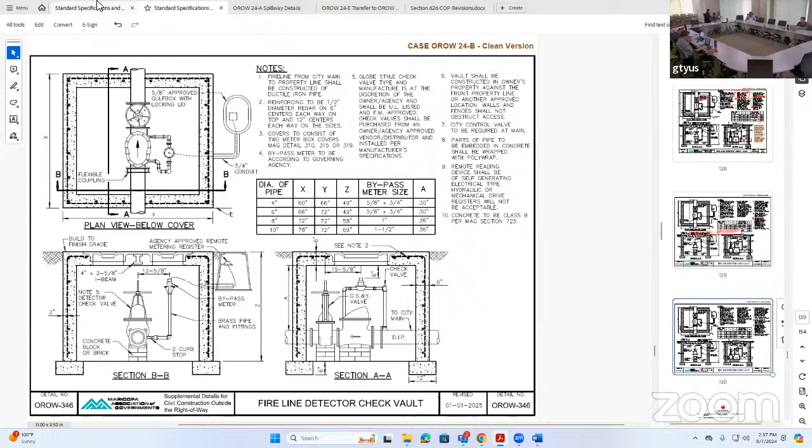All right, we're going to move into agenda item number 18, outside of right-of-way case 24-C. This is the corrugated metal pipe underground storage detention tanks. This one is also brought to us by City of Phoenix, Jose Rodriguez. Jose, do you want to provide any updates on this case? Yes, thank you, Mr. Chairman.

We had a pretty healthy discussion last time on the installation of these large CMP structures, for lack of a better term. I think the biggest take that came out of that is the suggestion to allow for the use of installing this using pea gravel. And so the detail now reflects that. It still calls out the potential installation using granular backfill, but it does present the option to use filter fabric and stone and clear stone to install it.

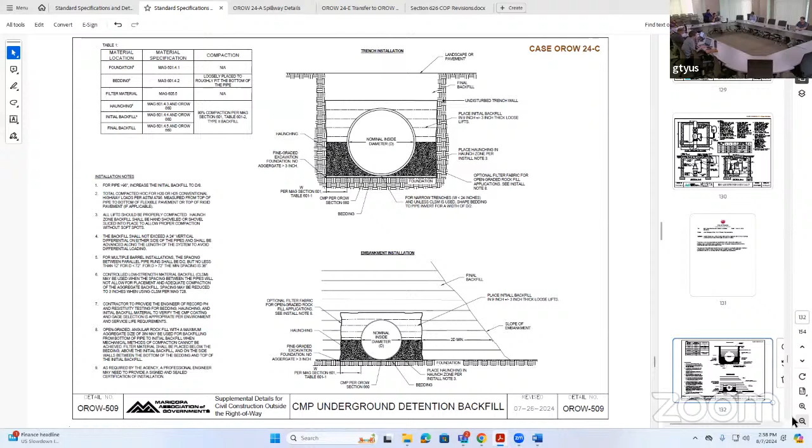I did ask our own City of Phoenix planning inspectors, and they did say that that's a pretty common method of installation too. So it looks like it's really coming down to most of these are being installed either with slurry or stone. So now this detail allows for all of them: granular backfill, CLSM, or flowable fill.

So with the controlled low strength material, would there still be a need for the filter fabric? No, the filter fabric is to prevent the migration of fines. But if you use a slurry, would there still be a need for the filter fabric? No, but it's always optional. It's called out as optional. It's an optional filter fabric for open graded rock fill. Gotcha.

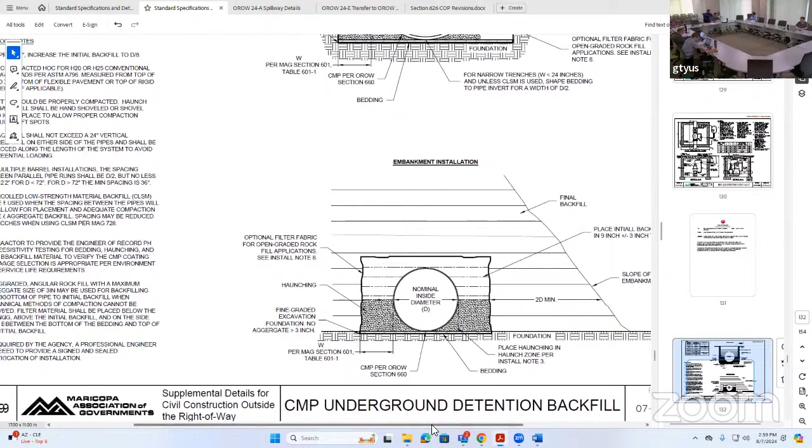All right. Those are the major updates overall. There was a lot of cleanup, and there used to be a table that showed the different backfill and compaction requirements. That table was simplified a lot, and it's on the upper left corner, so it just points out to the right section. Compaction not applicable. Okay. I will open this case up for discussion and comments from the committee.

Come on, Paul. I'm sure you have a comment on it.

So where would the CLSM go, in the lower half below the spring line? Is it restricted to spring line and below, or is it optional to put all the way up over the pipe? No, I'm just trying to make sure there's no note that conflicts it, but it's allowed all the way for the installation, all the way to the top of pipe. So you might want to add some note about it needing to be anchored down so it doesn't float.

That is one of the biggest challenges with using controlled low strength material, any kind of slurry with a lightweight pipe, or really any pipe for that matter. The method of holding down the pipe. No, it should just be restrained, or, well, not restrained, that might not be the word. Anchored down. Anchored, yeah, that's probably a better description of what needs to happen.

And the cement, that doesn't react with the pipe material, the corrugated metal? I can follow on that because I was looking for the question myself, Jim. You know, even the national standards recognize the use of CLSM as a backfill material, and they were really mute about any reaction with that. But I guess I'll vote on something when it comes up.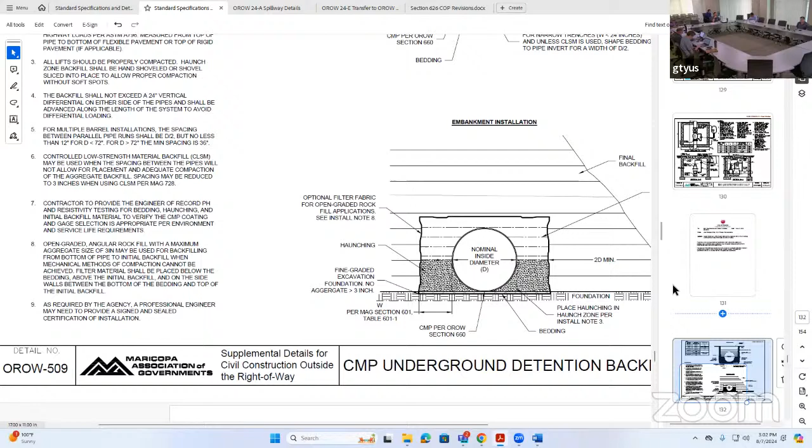Yeah, my question is, are we addressing cover or minimum clearance to pavement sections anywhere in here? Yes. Or is that more of a design engineer function? Let me. I think it's at the top of this sheet. Yeah, we had put up a note, but let me. Too many notes, huh? Too many notes. Yes.

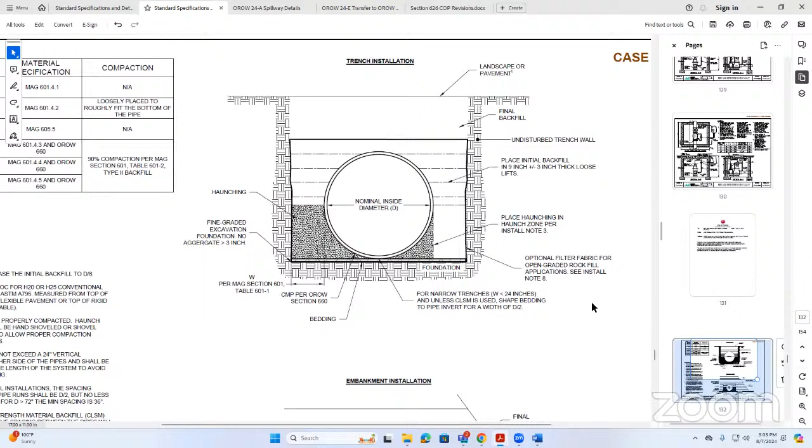Oh, I remember we had cover in a table, and then I thought you're right, we addressed it in a note instead. Yeah, but let me follow up, because we had some discussion related to making sure there's final backfill with pavement on it. So I see something in installation note 2 that seems to be kind of related to that, but I'm not sure how that actually correlates to the detail or depth.

Yeah, let me work on clarifying that, because there is note 1, but that got re-edited for a pipe larger than 96 inches. So okay, thank you. And I think in the section we talked about it too, a little bit. Yeah, we can make that match. Yeah, let's put that on the agenda. Make sure that gets taken care of in our meeting later this month.

I'm very sure we had that, but now I can't remember where it was taken care of, either here or in the section. Yeah, Simon, and reshuffling the detail around to make it a little bit cleaner. We might have. Yeah, that's what I'm thinking. Josh, thank you for that question and great comment. Any other comments or questions from the committee on this case?

Jose, when do you anticipate this going up? Is this going to be a carryover? I actually would like to just leave it as a possible action, if we can clean up and get back to the committee on some of the questions they brought up at the next meeting. Okay. I think there is a concern that the CMP specs need to be done simultaneously. So if you want to vote on this one, I think we also need to vote on the other case, because then this will be published but not the corresponding CMP, and it's going to be referenced. Yeah, that could be a problem.

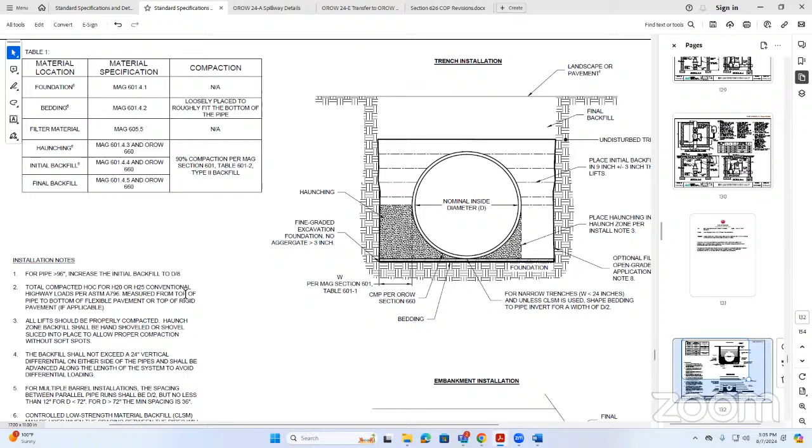Carry it over until we have a note that it's waiting on concurrence for the other case. That could be an option. I'm not sure how much it references those specifications. Just through the normal business on the meetings, carry a note that it's waiting for concurrence. Yeah, we'll probably need to talk about it at the working group, I think. Yeah, let's talk about it at the working group also. If case 11 doesn't go through, it could be problematic. Okay. Yeah, and that's probably a carryover too. All right.

All right, let's move into agenda item number 19. This is outside of right of way. Case 24-D. This is to add new detail outside of right of way 524 and section OROW 665 infiltration trenches. This one is also brought by the outside of right of way working group. Peter, you want to give any updates on this case, please? Yeah, so this was discussed in the July committee meeting, and we had some comments and discussions.

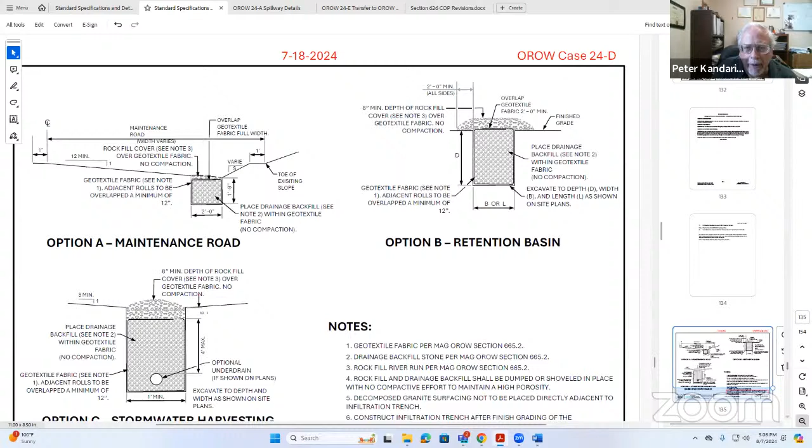And Gordon, I think you can pull up the draft detail. I think the comments were primarily related to the depth versus diameter. It was brought up by City of Chandler that we have to be careful, or at least warn everyone, that if the depth is greater than any of the width or length, then it could likely be defined as a well by the Arizona Code. So we added that note at the bottom. Note 8 was discussed and added in our last meeting. Otherwise, we had not received any other comments.

The section that goes with this, I think we're really waiting on more comments on this, unless there's some today. I don't see us being able to vote on this one right away. I think we really are going to have to wait. I don't think we made any changes in the section, did we, for our last meeting?

What I'm hearing, Peter, is you're okay with this one. You're good with this one. Yeah, we don't have comments yet, and I don't want to push this one through too fast, especially since we talked about potentially including a test method. Is that going to be appropriate? I think really we should make sure we get this sufficiently commented on before we move forward.

Great, thank you. With those updates, I'll go ahead and open it up for discussion to the committee. Yeah, we got a development that's using these because the water table's too shallow, and so I'm gonna get back and see what they have on their details, see what they have in common. But I do believe these need to be, and we have to come up with some kind of testing mechanism, Peter.

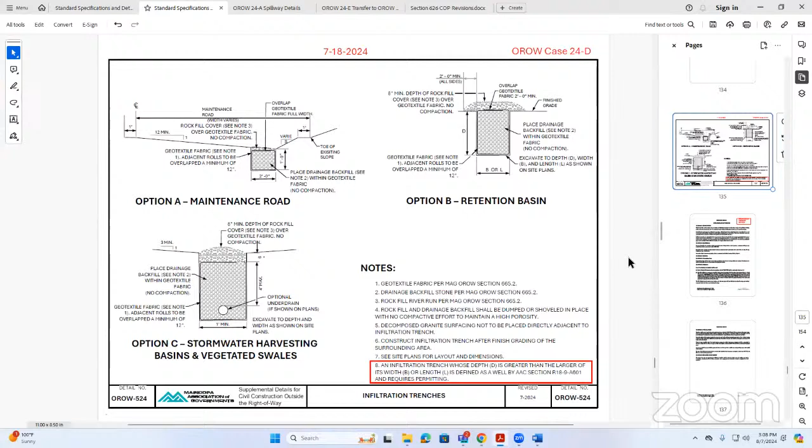Yeah, and in the standard, we did put some language on that. But like I said, I think this needs to be vetted a little bit more, especially the section where we talk about testing. We talk about percolation testing and methods. And I would like to make sure we do get a good level of comment. This is a bit of a deviation where we talk about this kind of testing. It really does kind of classify the design component of it. Do we want to do that? Also, we probably want to be looking at potential requirements for engineering inspection. And I think we just need more comments on this one.

I'd agree with you, uncomfortable rushing it. I didn't know how aggressive your schedule was with this. That's why I was prying. I'm glad we got it in so we can get it going, but it was important for us to get it in for this year for discussion so we can move forward with some of the other cases. Now we have something to reference to. So I think that was probably the more critical thing.

The other cases had to move forward, but they didn't necessarily need to have this done because they're not going to be passed this year anyway. But we needed to see what the language was to make sure that the others could move forward. So I don't see it as critical this one would be passed this year. Thank you, Peter. Any other comments or questions from the committee members on this case? All right, hearing none.

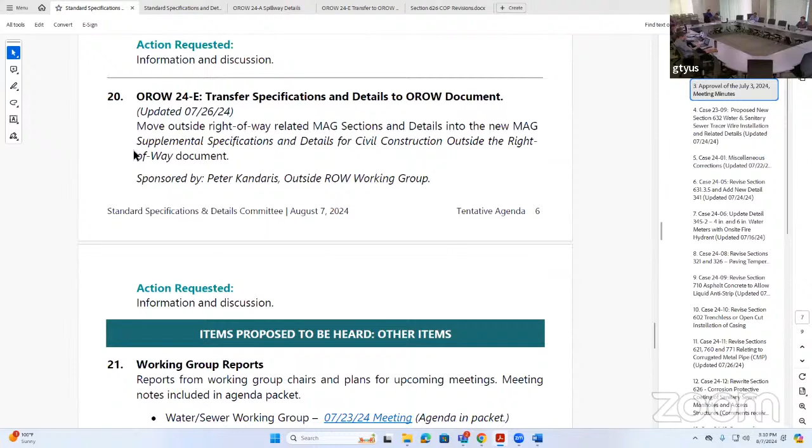We're going to move into agenda item number 20. This is outside of right-of-way 24-E, transfer specifications and details to outside of right-of-way document. This one also, Peter, don't go away. This one also is brought to us by the outside of right-of-way working group. Peter, you want to go ahead and give us any updates on this?

Yeah, so from the comments we received when we introduced this last meeting, changes have been made to this. Items that were taken out upon request of the committee included the precast safety curbs, the chain link fence, bollards. So the details and standard sections were removed from it. But what was added was the pervious concrete elements in the section. We had the detail, but not the section. So 303 and 323 being moved over. Also, we're providing recommended section numbers in the outside right of way, how they would be put together.

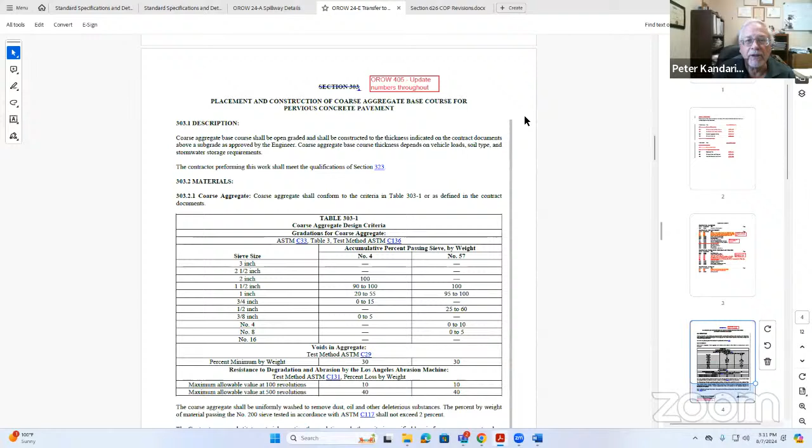So this is just a bit of an update. I kind of consider this just like the bloopers kind of case. It gives us at least an opportunity, at the end of each year, to see if anything needs to be moved around or modified. Like miscellaneous corrections almost. Yeah, it really is that. So we'd hope to vote on it next meeting. One thing I probably should do is look through each of these just to make sure there's no cross-reference issue, if we have to change a number here or there. I don't think there's going to be, but it would behoove me to do that. But I would like to have this voted on the next meeting.

Peter, or maybe this is a question for Gordon. These revisions, are these some of the revisions that didn't make it into the packet for this case for 24-E? Yeah, it was mostly just the listing, and Gordon was good enough to go through and actually see what that would look like. He did some mock-ups of what that would look like in the outside right of way. The listing did not get in there. These were for our discussion in the last one, so no, I didn't get that in the packet.

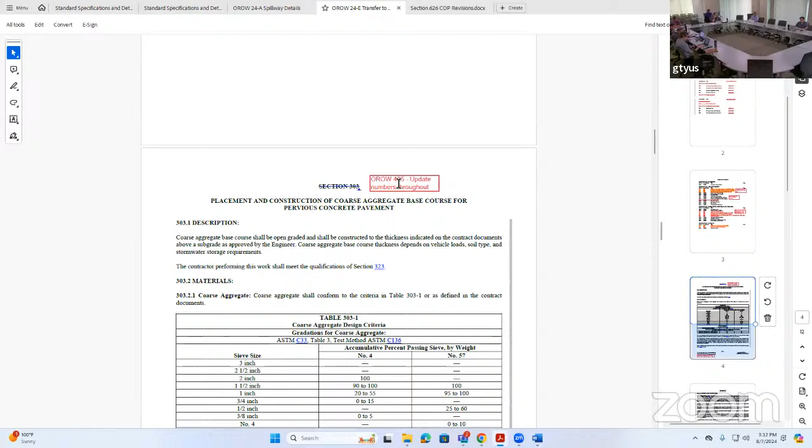So, yeah, some of the outside right of way numbers were updated. So based on those, I made some changes to these notes that were in the packet. In the packet, I think it might have said 401 instead of 405. So there's a few changes.

But other than the numbers, I think this number changed. This was just to show the existing MAG specifications and to note that basically all we would need to do is change the numbers, the footers, and any references. Like when it's referencing section 729, for example, it would need to be MAG, and if it's referencing something within the outside right-of-way document, you would note that new number. You would note it as RO.

Yeah, ROW. Okay. So for example, I don't recall, but if this references, for example, the pervious concrete base spec, and we're changing that from 303. Yeah. What we'll do, if the list is sufficient, if everybody's satisfied with the listing, then for next meeting for voting, we'll go ahead and have all those details identified where it's OROW or MAG.

Yeah. Okay. For some reason, we kind of lost a little bit of audio on you. I caught the end of that. I don't know if a button was pushed, but your volume went way down. Can you hear me? Yeah, I got you now.

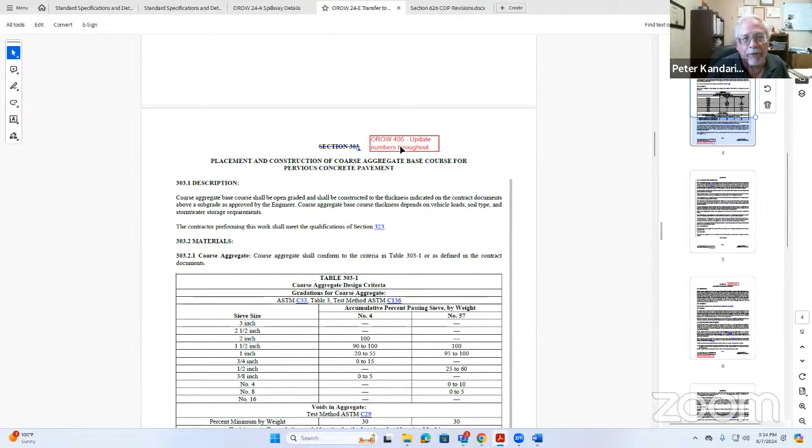So okay, let's go ahead and move this for possible action at the next meeting. Is that what I'm hearing? Yes, and we'll go ahead and take all of those and clean them up so you see what is outside right-of-way, what is a MAG reference within that, and have that ready to go. All right. Thank you, Peter. Gordon, if you could put that on there for possible action, I'd appreciate it.

All right, we're going to go ahead and move into items proposed to be heard. Other items. This is agenda item number 21, working group reports. We'll go ahead and start off with the water sewer working group. Jim, do you want to give us an update on that? Yeah, Mr. Chairman. So we met on July 23rd. I'm not going to rehash it. A lot of the cases that we discussed today were covered.

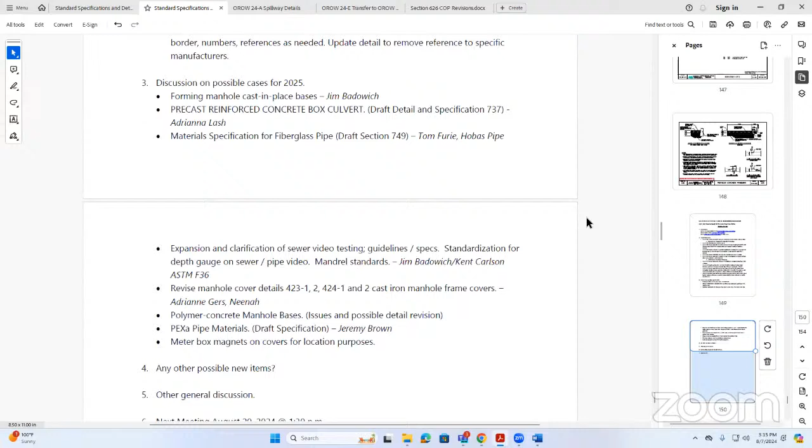We've kind of finished up the loose ends on Warren's case for the tracer wire. I really want to thank him, and everybody else who helped out on that. That was a lot of work. So really appreciate it. We got that voted on today. So, yeah, I kind of went through some of these other cases we discussed today. Arvid's case, just some loose ends. We had some discussion on the coatings we talked about with the manholes. What else? That was about it on the cases.

And then we did have some discussion on some other pending cases for next year. We had some discussion on the mandrels, sewer mandrel testing. Oh, yeah, that's a big one. Yeah, we've got a guy in the industry working with us, and his name's Kent Carlson. He's actually on the ASTM committee, and it's a slow process, but they're going through that. I don't know where they're going to be at next year, but I'd still like to vote on some kind of a standard for these mandrels next year.

But the big discussion on that is the diameter. Industry has two references. There's a mean diameter and a base diameter, and I think one or two agencies locally use the one which is more restrictive, but the more common one, I think, is the mean one. I get them mixed up, but it's a little bit smaller diameter, so obviously it's going to pass more. But we just got to come to some conclusion and go with it. So we'll probably follow that off season here. I do want to do something next year on that for sure.

And then I had to cut out early, so I don't know, Gordon. I think you guys were still talking about meter boxes. So there was a little discussion about using magnets on the meter boxes that aren't metal in order to find them easier. Yeah. And then also I got a note from Jeremy Brown that he's looking at possibly picking up the PEX-A pipe specifications next year and maybe introducing that. So it doesn't sound like your working group's going anywhere.

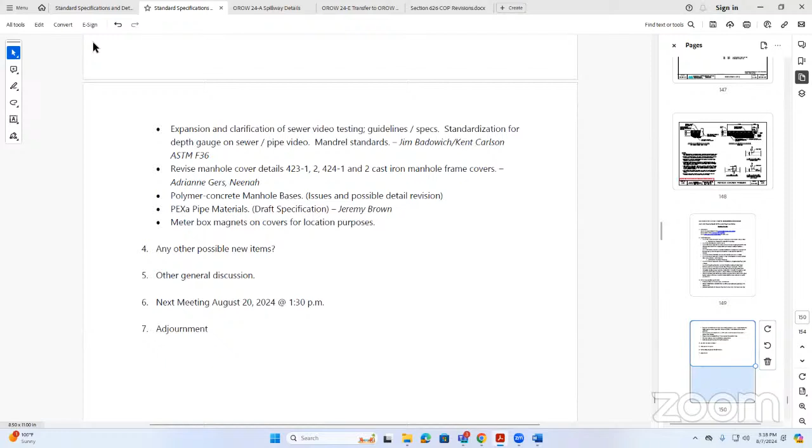Thank you, Jim. Thank you for the update. We'll go ahead and move into the asphalt working group. Greg, you want to give us a report on the asphalt working group, please? Sure. Our meeting was on July 18th at the ARPA offices. We just kind of went through the two cases we talked about already today: 2408, just to see if there were any comments, which obviously there weren't, and 2409 was the culmination of that, which was in today's packet.

Beyond that, John Shear from the county was there with us this month, so he wanted to talk a little bit about the acceptance criteria for slurry seals again in production, as opposed to just design. Didn't we just get through that? We just did it last year, so I think we worked our way through that one, and then talked through the different methods between the Arizona method and the ASTM methods for proctors. I think all that got resolved. Good conversation, pretty lengthy conversation.

And then we also talked about recycled materials again. In this particular case, I think I mentioned it last month, we called it fuzzy base, but it's probably not the right nomenclature. It's recycled concrete that has fiber in it. So what those products look like, different variations of fiber, monofilament potentially. So if you crush it to meet, say, an AB gradation, what happens if you get a piece of fiber that links together when it's going through the sieve?

So those conversations are going to continue, especially around recycled materials, not just recycled concrete, but I would imagine that's going to be the bulk of what we're looking at, at least going into next year. Other than that, that was about it. When the suppliers pull out the concrete, just for the sake of conversation, do they take it to a certain pile if it has fiber mesh in it?

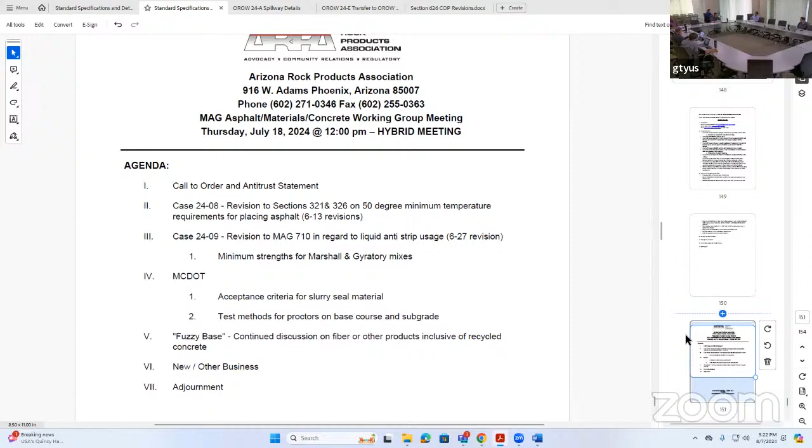All right, we'll move on to the outside of right-of-way working group. Peter, you want to give us the report? Yes, thank you, Mr. Chairman. I think we talked about the majority of the cases that we went through already. I'd like to look a little bit more at the new cases. We had our meeting on July 18th and went through those. It's shown here as 2024, but these are some of the ones we're going to be talking about for 2025.

And that's going to be, I think, a large part of our focus. We'll do some cleanup on these, but I think primarily we're going to be looking at additional options for detention tanks, starting to broaden those out to, again, as products change, products are being added to the market, making sure that those can be incorporated within these. The stormwater harvesting basin is the next one after the rock and vegetated bioswales and the infiltration trenches. It's the one now that can be started on.

HC supplements, I think we're there, but I think we also are going to be talking again more about the dry wells. We postponed those for a while. I think 2025 is the year for that. The other ones we talked about prior, which would be related to offsite valves, things like that have been in MAG, that are in city standards, and start getting those reorganized again. And then look at the LID development book and see if we can get some volunteers to start moving forward in some of the other optional methods for LID systems.